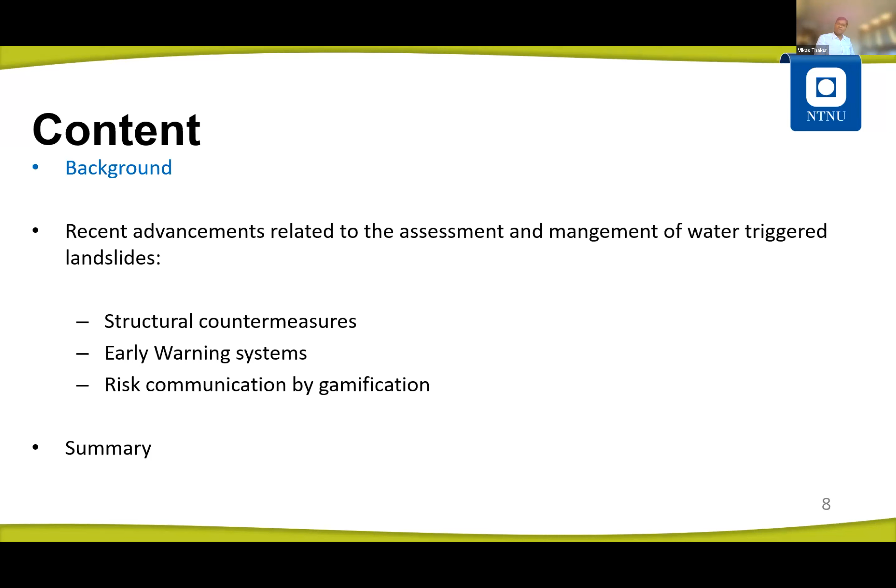So let's get going with background. I think it's good to start with our domain. Our domain is civil engineering, where geotechnical engineering belongs.

Or more specifically, let's say, construction industry. Of course, geotechnics has different applications, but if we limit ourselves to construction industry, what is the importance of our sector? Construction industry creates approximately 7% of jobs worldwide. It is responsible for 10% of GDP, but it also consumes 17% of fresh water due to different construction activities.

We are responsible for almost 40% of energy consumption and approximately 40% of CO2 emission. We use almost half of the raw materials available on this planet, and land harvesting is almost around 60%. So we usually call our sector a 40% sector, because it is responsible for almost 40% energy consumption, CO2 emission, use of raw materials, and so forth. So we can also say we are 40% of the problem we are facing in the construction industry.

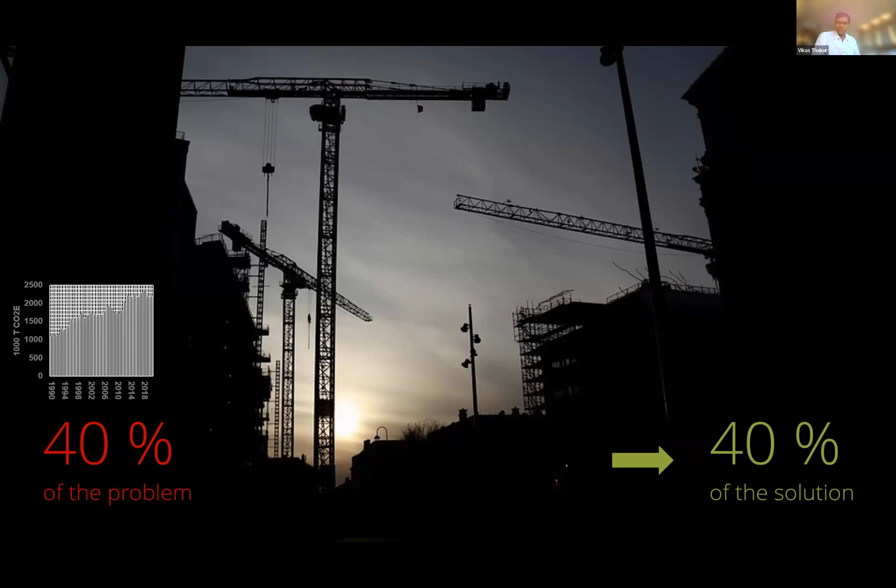The good news is that we have 40% of the solution as well to create a low emission society by 2050 or 2060. This can be done by adopting circular economy, smart materials, waste management, getting a green shift in the built environment, and also creating resilient infrastructure. So though our sector is responsible for a large amount of CO2 emission, I think we are also 40% of the solution.

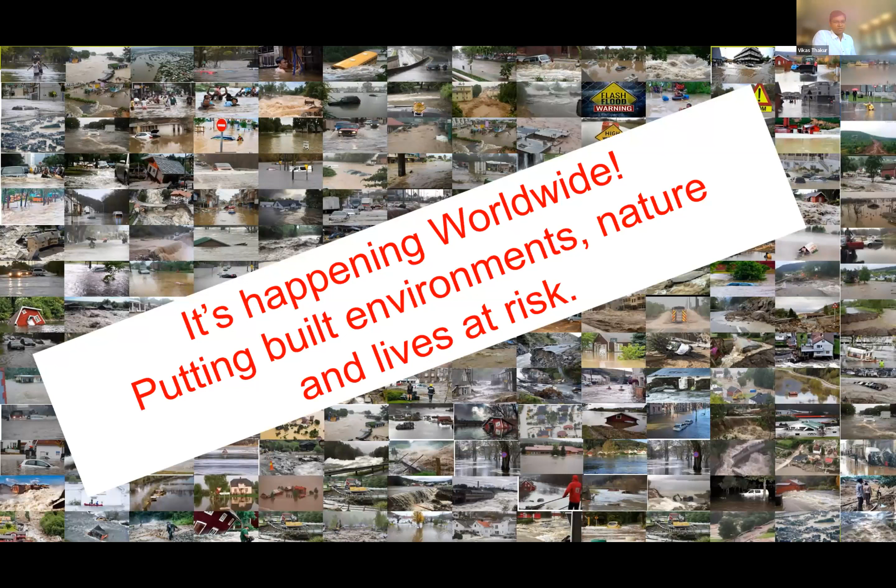I will say the future is already here. There was a time when we talked about climate change causing extreme weather events and so forth, but I feel it's already here. What we see - extreme weather events in terms of flooding, flood-induced landslides, and destruction of infrastructure - is happening worldwide, and it's putting built environments such as buildings, roads, railways, bridges, tunnels, or nature, and also lives at risk. So the future is here. We see already the impact of climate change all around the globe.

So it leads to societal safety. How safe are we? And do we have infrastructure that is resilient enough to handle the climate effects we see now?

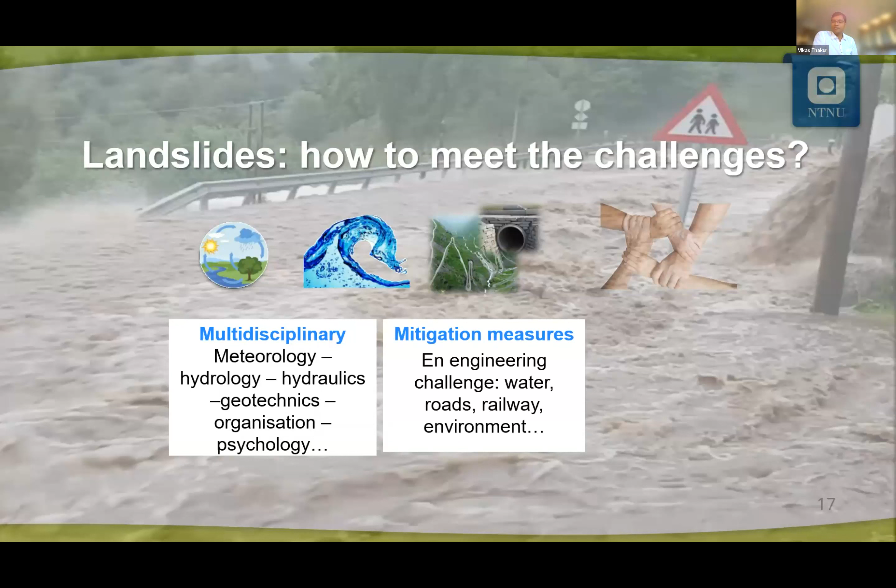Of course, we need to think about mitigation measures, which is an engineering challenge - how to make resilient infrastructure, how to make structural countermeasures capable of handling large landslide events. But preparedness is also equally important, because the way natural hazards are handled at county level, state level, or federal level, there are some challenges in terms of how preparedness is organized, how we communicate risk, and how we manage risk.

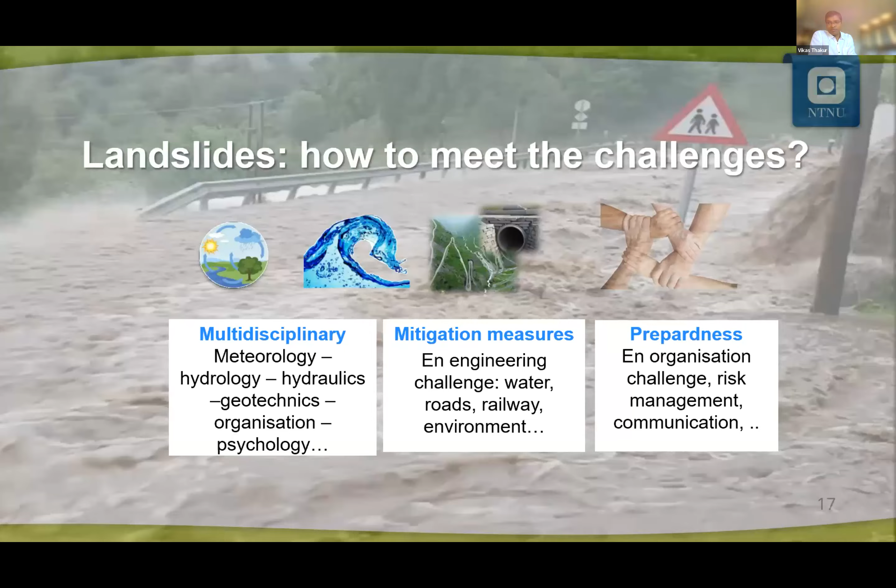I will briefly go through all these three in my presentation through some recent developments we have made. Whatever I present here are basically some selected results from a center which we recently executed, called Center for Research-Based Innovation, Klima 2050, and other research activities at NTNU.

This research center was a national center where NTNU, together with SINTEF, Business School in Norway, the Meteorological Institute, NGI, together with public and private partners, did a tremendous amount of work related to climate adaptation, where natural hazard, water-triggered landslides was one of the key areas. In addition, there have been several other ongoing research projects at NTNU, where 6 different PhDs have been working along with more than 30 master students. Also, a couple of professors and associate professors have been part of the team doing this research. So I'll present a summary of some selected results conducted by some of the PhDs at NTNU.

My focus will be towards water-triggered landslides, either soil slides or debris flows. I will start with structural countermeasures.

When we talk about structural countermeasures, there exist more than 70 types already. Those countermeasures are useful depending on landslide types, material types, velocity, and individual landslides.

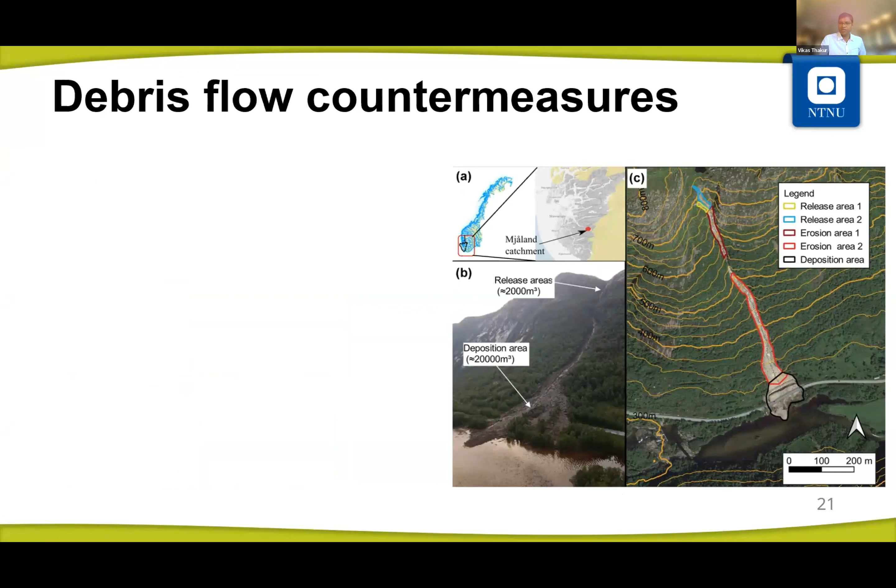What I will focus on now is debris flow countermeasures. Debris flows are becoming very common in Norway due to excessive rainfall. Basically, debris flows are very rapid to extreme rapid flows of fluidized, non-plastic soil-water mixture.

One typical challenge with debris flow dynamics is that they get significantly affected by entrainment, meaning the debris flow starts very small and its volume increases, which may lead to longer runout and high impact forces on infrastructure. So why does this entrainment occur?

Entrainment occurs when a debris flow shears a soil bed and generates excess pore pressure, which reduces the shear resistance of the bed.

In simple words, entrainment is a process where a debris flow or soil mass, as it goes downhill, collects more material along the way. As you see in the figure, the release area was 2,000 cubic meters. It's a photo of a debris flow event where the initial slide was around 2,000 cubic meters, and the total deposit was up to 10 times more, about 20,000 cubic meters, in the depositional area.

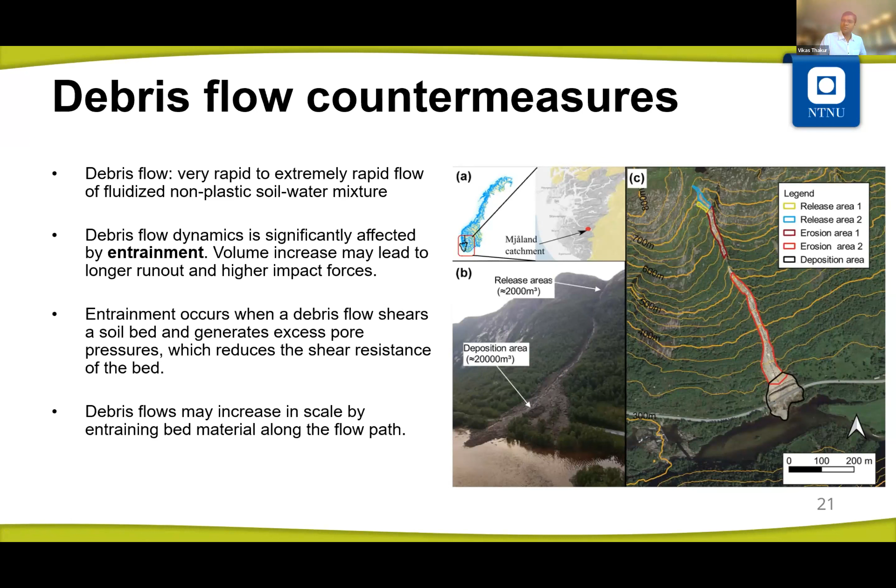As the debris flow propagated downhill, it collected more material and became larger and larger, just like snow avalanches. So in debris flow, one of the biggest challenges is entrainment, how to manage it, and it affects the design of structural countermeasures.

So what is a typical countermeasure used in Norway? It's a terminal wall, a simple structure used in Norway and many parts of the world, but it does not account for entrainment or flow volume growth. So how can we mitigate debris flow and reduce entrainment?

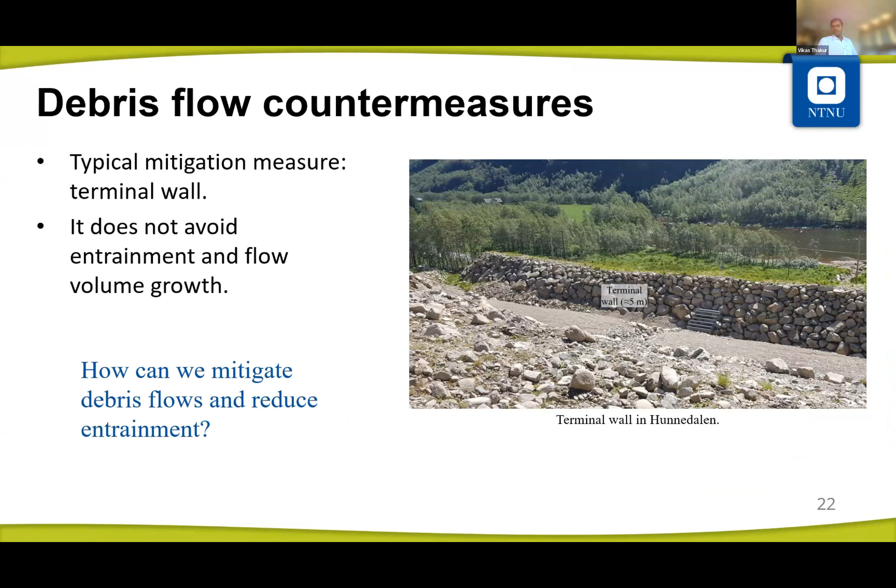Recently, two PhDs were conducted on this topic to study debris flow countermeasures accounting for bed entrainment. One PhD studied a screen structure for mitigating debris flow along coastal roads, and the second was related to flexible barriers.

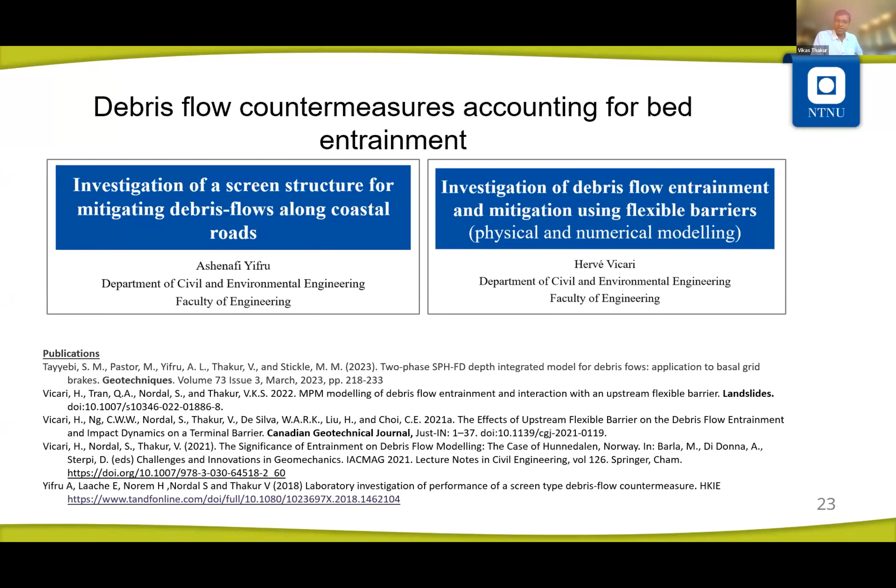I will present some results from these two works. They have made some publications which can be referred to for more information. The first work was related to the screen structure.

The idea of using a screen was conceived in Japan with the intention to reduce energy in debris flows and thus contribute to mitigating damage in the downstream area. The main purpose of this screen is to separate water, or the fluid, from the moving debris.

As a result, pore water pressure developed inside the debris flow, particularly in the shearing zone, dissipates. In return, debris solid particles regain their contact friction, thereby increasing the shearing resistance of the moving debris.

Basically, screens are very simple structures with grates, which have openings in between. So once debris passes on top of them, it allows water to seep through, as well as dissipating excess pore pressure.

In doing so, we increase the interparticle contact, and therefore the debris slows down and, in fact, stops.

We studied this at the lab, using about a 10-meter long flume, where 6 meters was the flume section.

Just a second, I'll get a pointer.

It's a flume which has a 6-meter long runout channel and a 4-meter depositional area. The flume was instrumented with various types of sensors to measure flow heights and pore water pressure at the base.

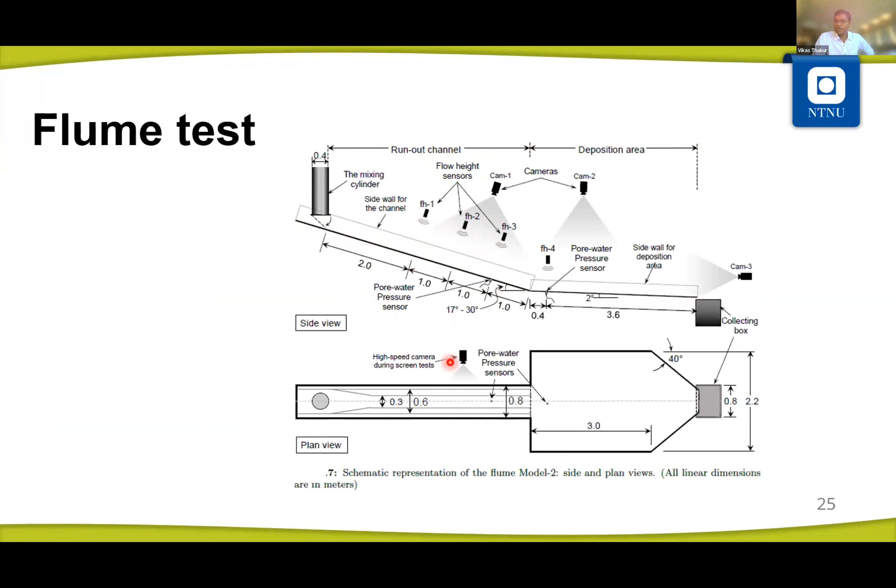We recorded videos using high-speed cameras, and different measurements were made using sensor techniques. This is how the flume model looks like.

Here is the runout channel, and here is one debris flow screen which was placed; the flume was 60 centimeters in width. Various tests were done by changing the length and size of the screen.

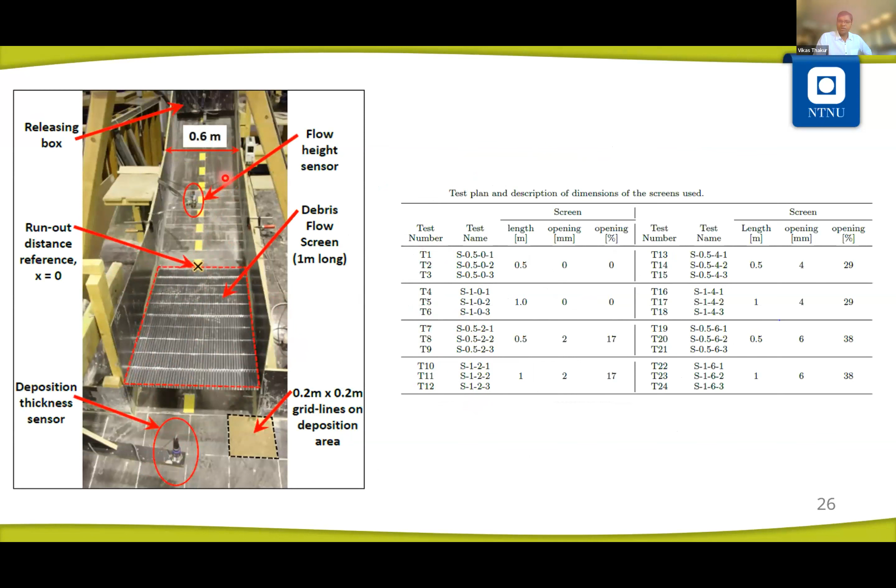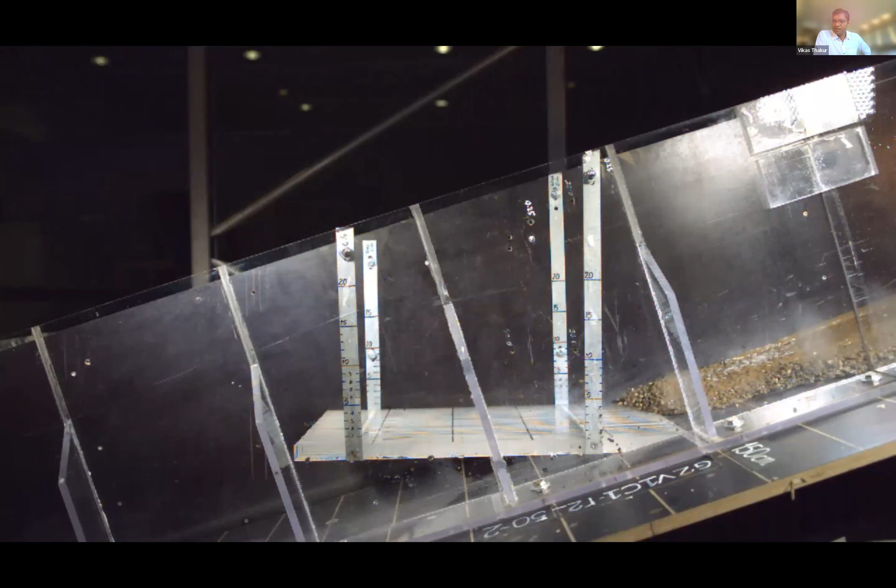Tests were also done by changing the concentration of the solid-fluid mixture. I will show you one result if I am able to. Here you see moving debris on the debris flow screen.

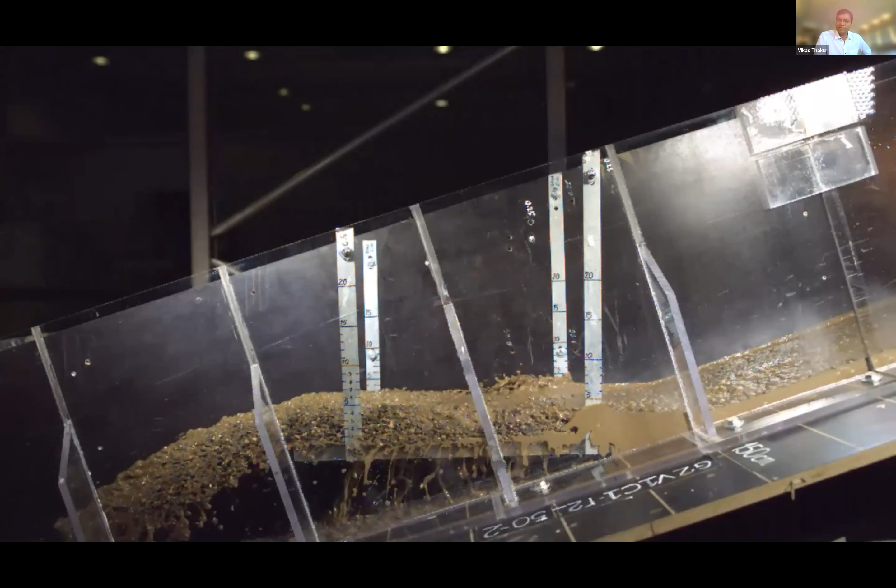As you will see, debris moves on top of it. Eventually, water will start to seep through the screen, and in doing so, intergranular contacts will increase, and slowly solid materials will pile up on top of this screen. It's worth mentioning that such countermeasures will not necessarily completely stop the movement of debris flow, but will significantly reduce the velocity, and thereby the impact caused by debris flow.

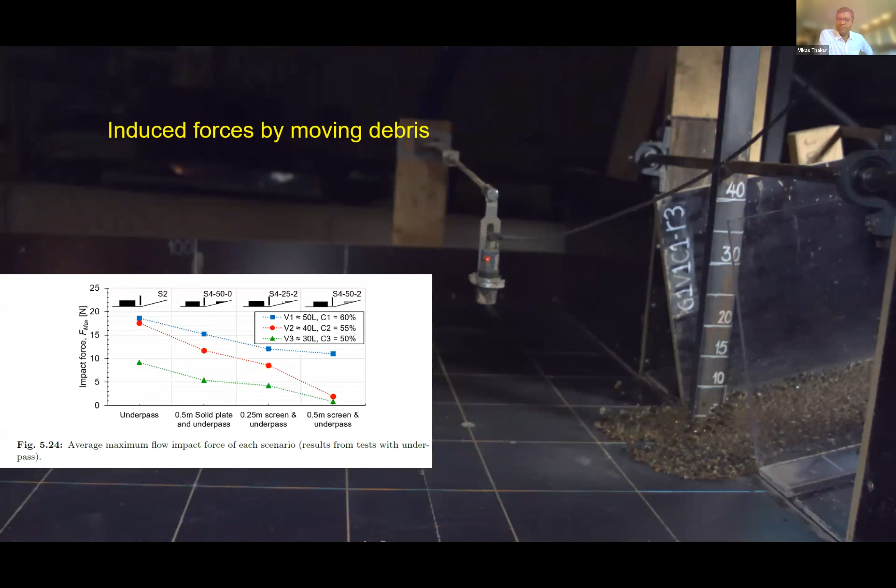So we studied the impact as well, and here you'll see this vertical pillar where we were measuring the impact of a moving debris. Quite many tests were done, and we can see that impact forces were reduced as we used a screen type countermeasure. You see some results on the figure to the lower left side, showing that impact force is reducing. So there were some promising results.

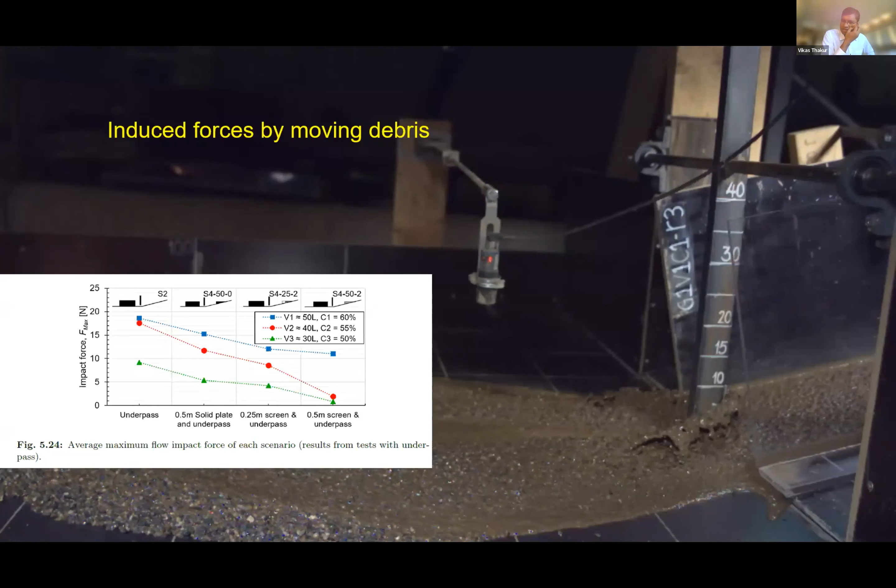Yes, this kind of screen may work despite it not stopping debris flow completely.

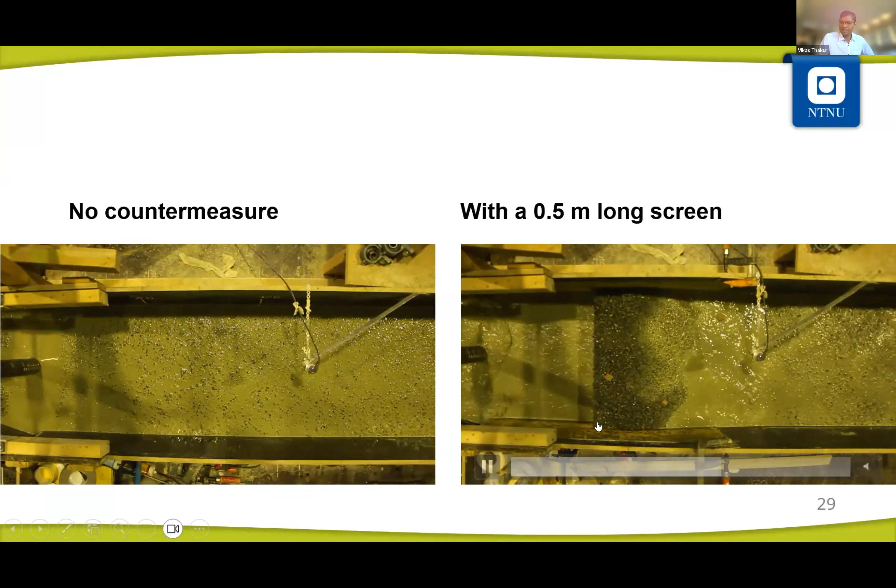Here you saw the same video in real time. The left one was without countermeasure, as you will see material just runs through. On the right side, you will see how quickly material stops on top of the debris screen. All these tests are done in the lab, and the lab has one very big disadvantage when we study debris flow, and that is scaling effect, especially with small models such as this.

So upscaling is always important, and to do so, we have to go for numerical simulations or sufficiently large model tests. At that time, we did not have a very large flume, so we decided to go for numerical modeling, using the GeoFlow SPH FD numerical model developed by the Madrid group and Manuel Pastor. SPH stands for smoothed particle hydrodynamics, finite difference numerical model.

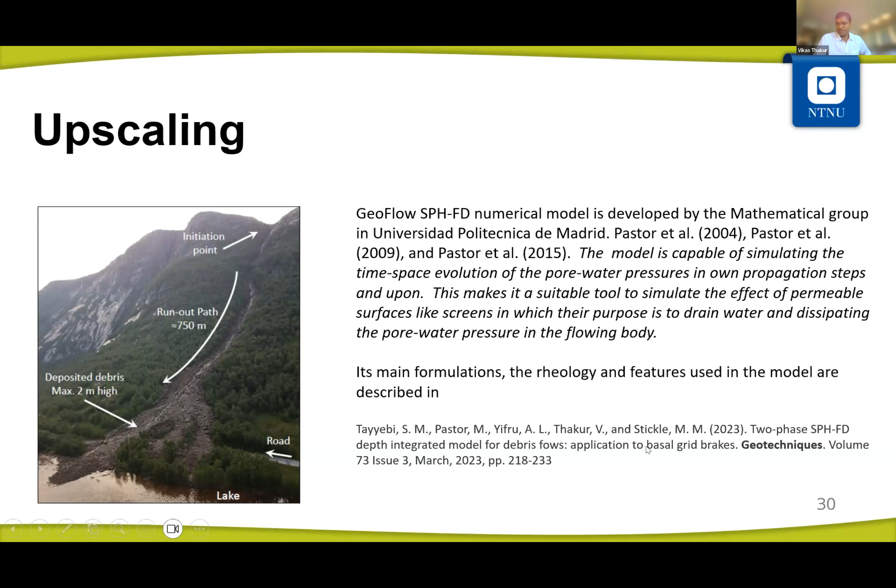The model is suitable for modeling debris flow screens because it's able to simulate the effect of a permeable surface, like a screen, whose purpose is to drain water and dissipate pore pressure in the flowing body. The formulations and rheology of the model can be obtained from one of the papers which was published recently in Geotechnique.

So in summary, the debris flow screens were able to slow down the mobility of the flow mass. The main purpose of the countermeasure was to dissipate pore pressure by filtering out the fluid part from the debris flow. The numerical simulations using this GeoFlow model gave quite promising results. It was able to replicate runout distance, flow heights, deposition height, flow velocities, etc. So the results are quite promising.

However, there are some practical challenges. How to install this kind of screen and maintain them, especially in steep terrain, will be very challenging. It will not be easy to install them. Perhaps it is more suited for flatter or mild sloping terrain, not for very steep terrain.

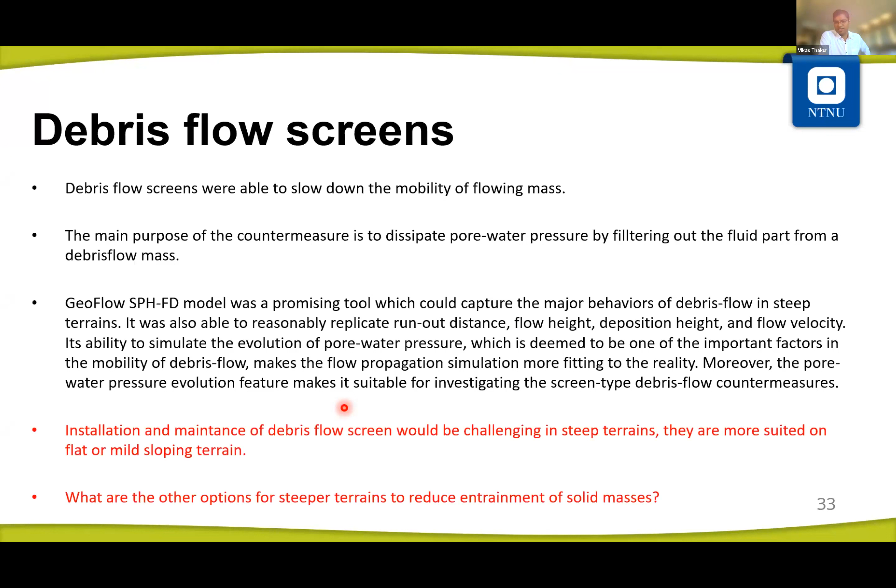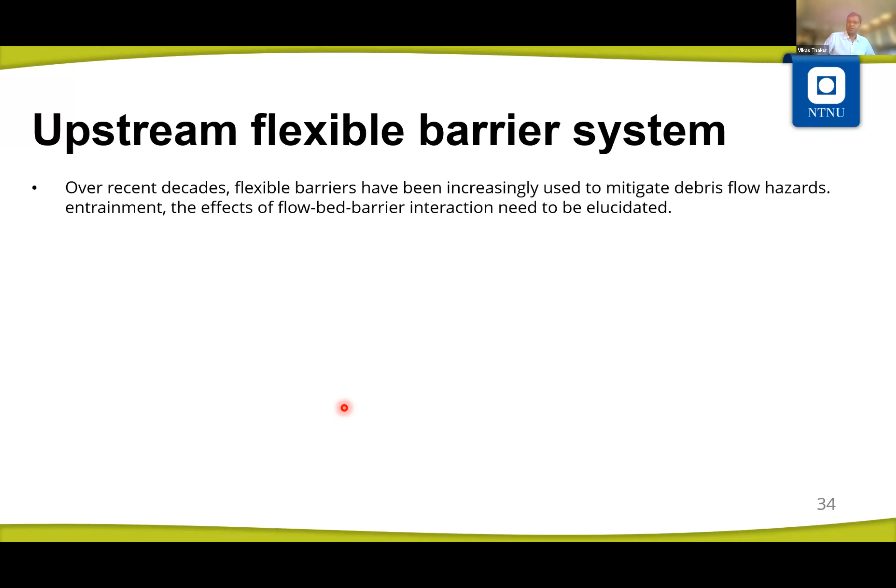So we started to look for other options to reduce entrainment of solid mass on steeper terrain, and that brought us to the upstream flexible barrier system, the second PhD work. Over recent decades, flexible barriers have been increasingly used to mitigate debris flow hazards. The entrainment effect of flow-barrier interaction needed to be elucidated. One of the design functions of installing multiple flexible barriers in a channel is to reduce bed entrainment.

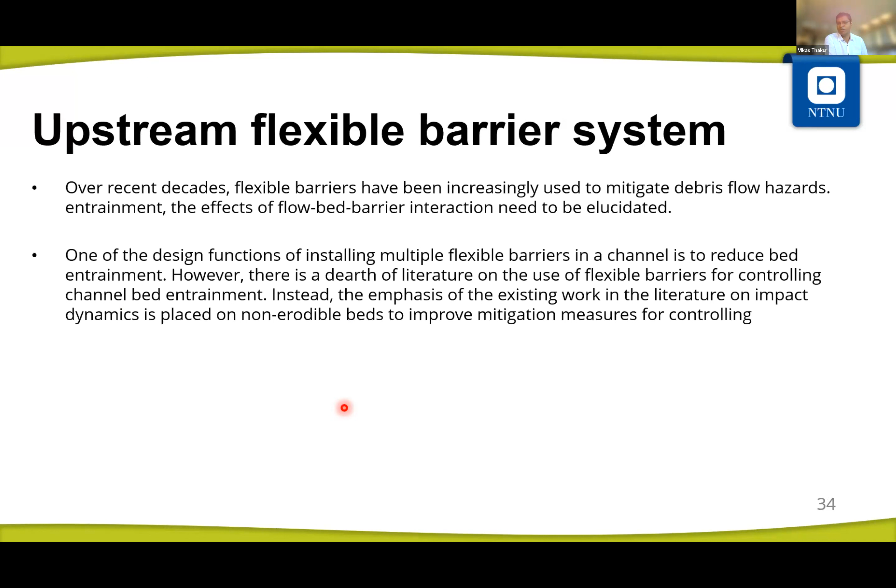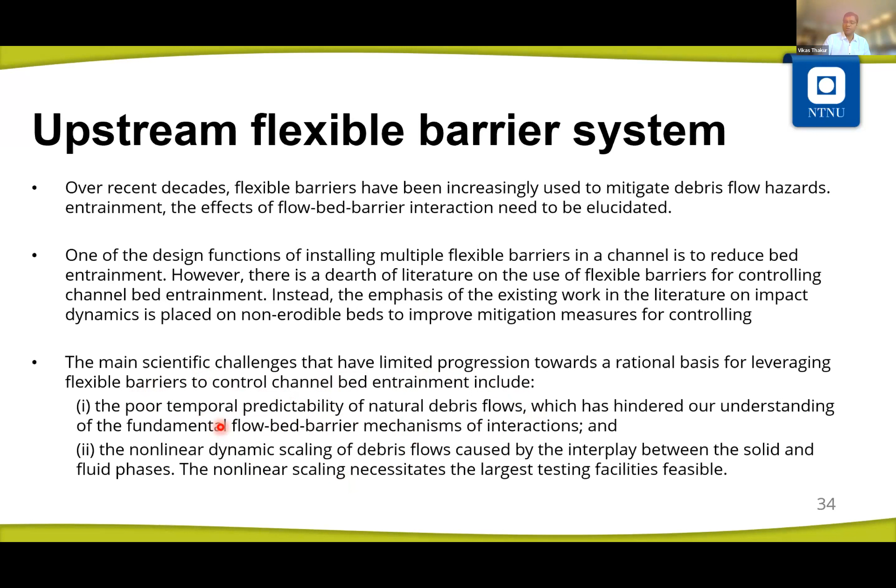However, there is a dearth of literature on the use of flexible barriers for controlling channel bed entrainment. Instead, the emphasis of existing work in the literature on impact dynamics is placed on non-erodible beds to improve mitigation measures for controlling flow. So there are some scientific challenges, especially in understanding bed entrainment because of poor predictability of where debris flow may take place, but also the scaling effect from very small flume tests. So what we did is actually a large-scale flume test, done in Hong Kong. The model, developed by Professor Charles W.W. Ng, was used to minimize scaling effect. We wanted to measure flow parameters in entrainment and also the influence of flexible barriers on entrainment.

This 28-meter long flume was utilized, where almost 7 meters was a fixed bed. We placed one upstream flexible barrier on the upstream side, and made an approximately 6-meter long erodible bed, with a terminal bed at the end.

We could use up to 10 cubic meters of debris flow material, 6 to 10 cubic meters of debris flow material in the test. Various measurements were made using some erosion measurement technique.

I'll come back to this, but also we measured the normal stresses and shear stresses to understand the basal stresses at the base of the debris flow, using cell 1 on the upstream side and cell 2 where we wanted to have entrainment.

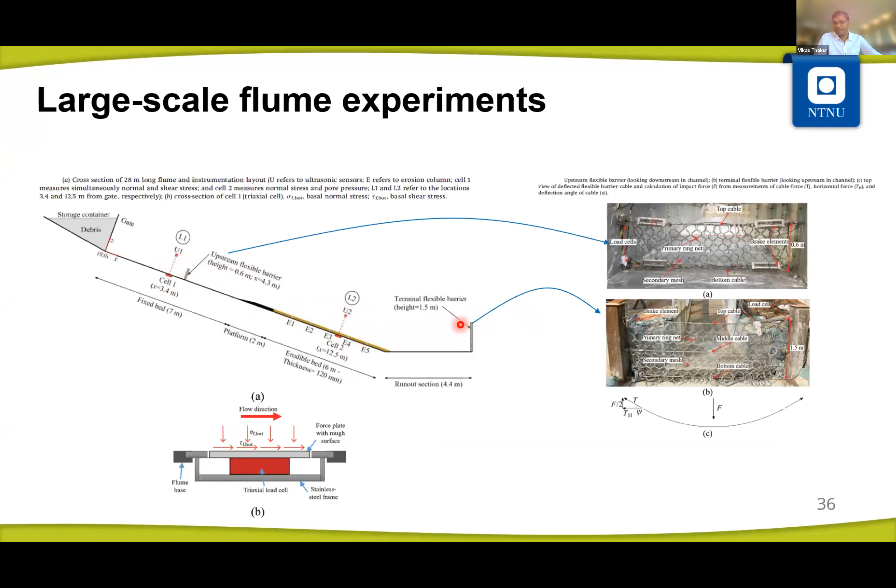Flexible barriers look something like this. The upstream flexible barrier was just 60 centimeters tall, whereas the terminal flexible barrier, where the mass is supposed to stop at the end, is 1.5 meters in height.

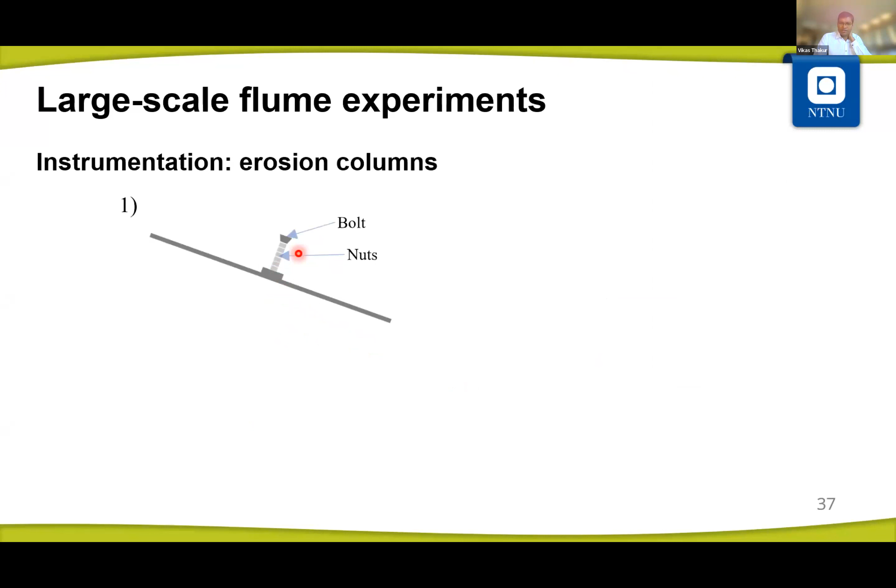To understand entrainment, we developed something called an erosion column, a very simple technique where we took 5-millimeter high nuts and installed them using a bolt in the model, just as you see here: E1, E2, E3, E4, E5. If you look at E1, for example, this is how the structure looks like.

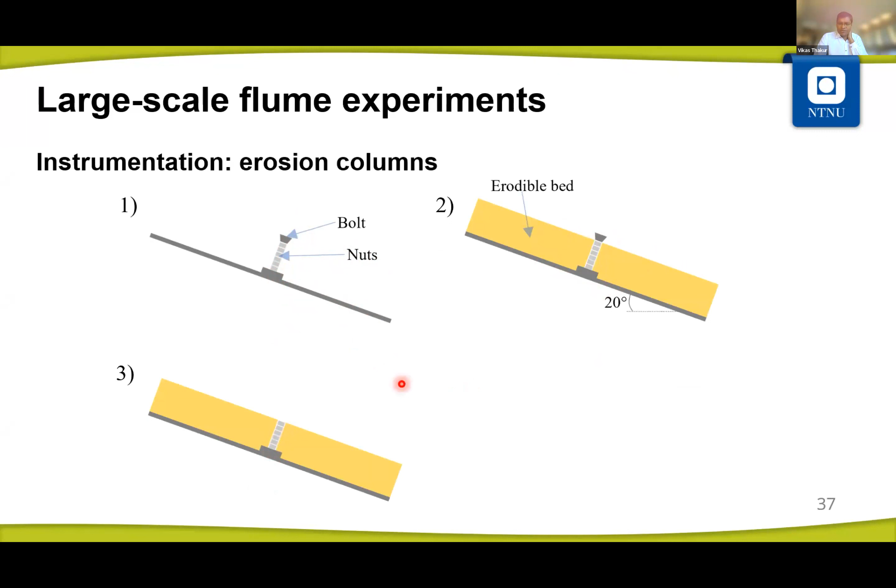The nuts were placed using a bolt. After this setup, we placed the erodible bed around it, and thereafter removed the bolt so that the nuts stood in the form of a pillar. Whenever we did the model testing and erosion took place, it also removed some nuts, through which we knew how much material had been eroded or entrained. The height of these nuts was 5 millimeters.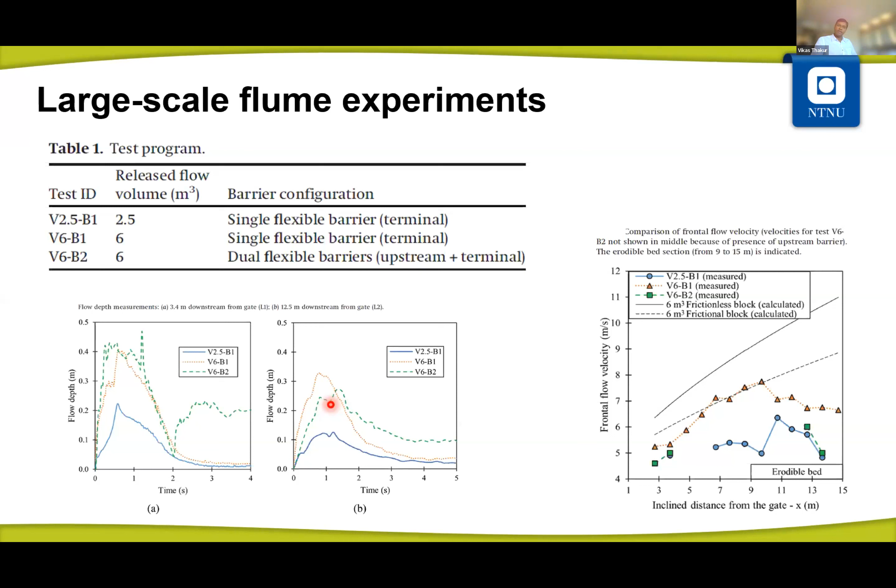Let's focus on the last 2 tests, since they were of similar volume, so we can see the effect of the flexible barriers. Various observations were made in terms of flow depth and flow velocity, and the results were compared. But before that, I can show you a video of the test.

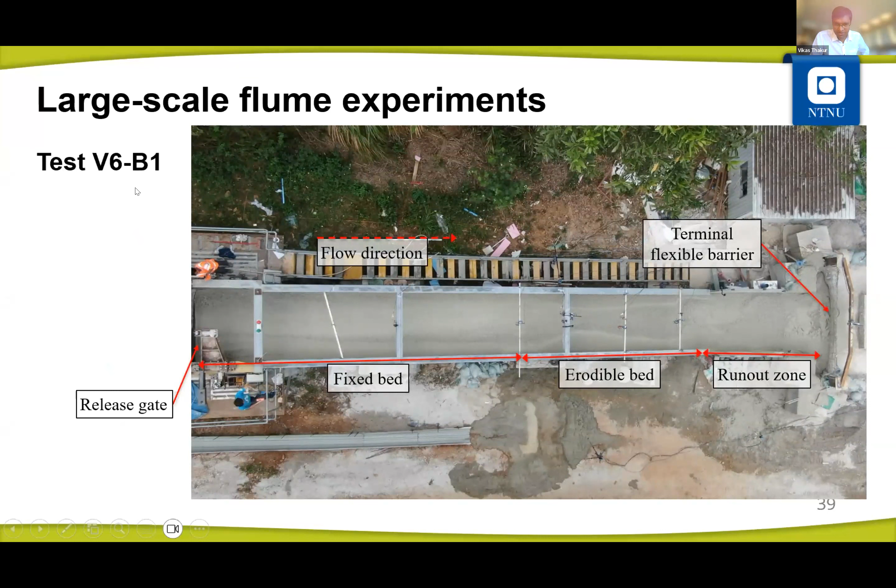And this is a video from V6 B1, where only the terminal flexible barrier was used.

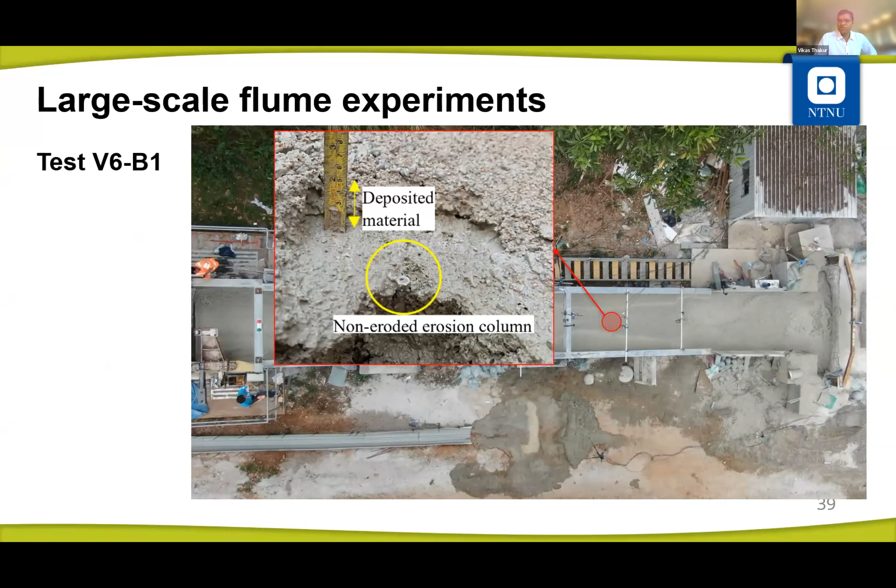We measured erosion in the entrainment zone by counting how many nuts were removed due to the erosion process, and we were able to measure the entrainment depth for each test.

The major conclusion is this: the higher entrainment happens at the start of the erodible bed. Higher initial flow volume also means higher entrainment, meaning that if more debris flowed onto the erodible bed, there was more entrainment.

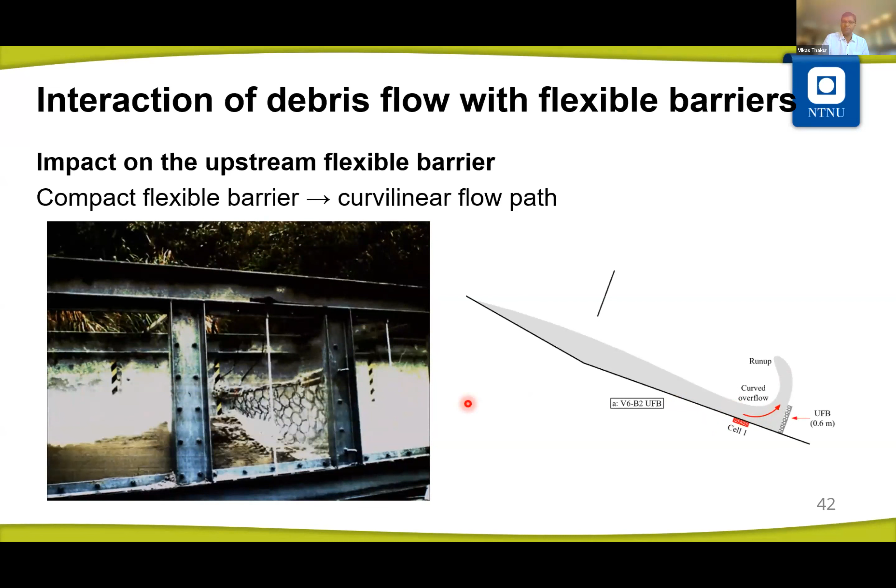So what is happening at the flexible barrier itself? It was interesting to observe that when we had the upstream flexible barrier, there was a curved overflow of the debris mass, and this has an impact on the design principle for the upstream flexible barrier. I'll come back to this.

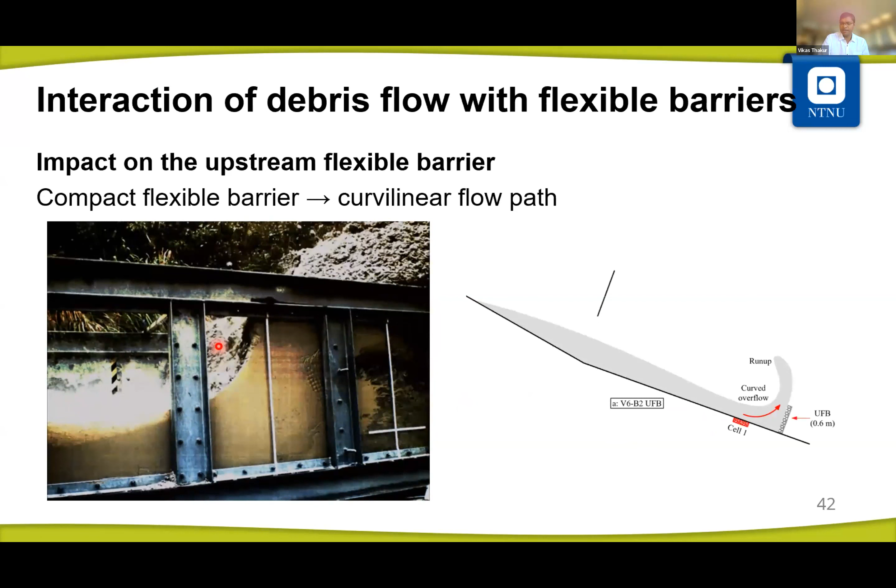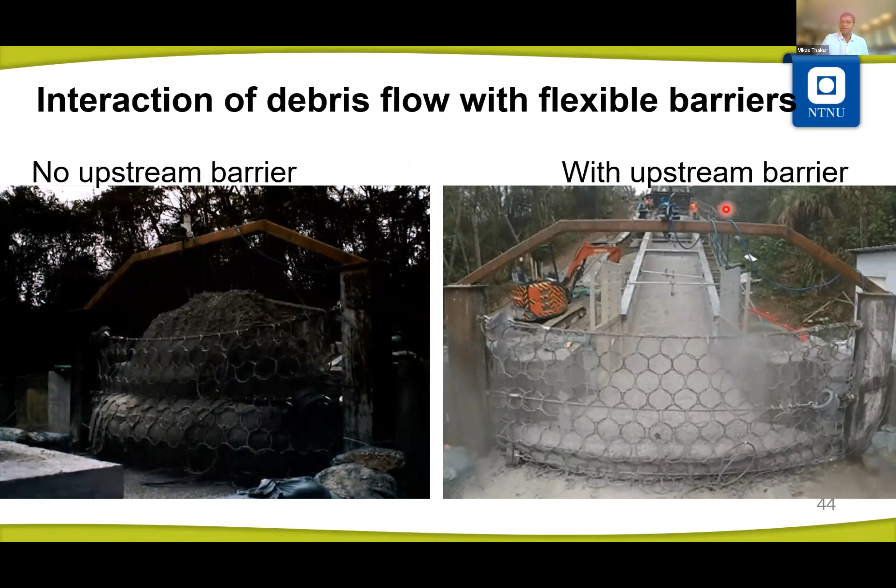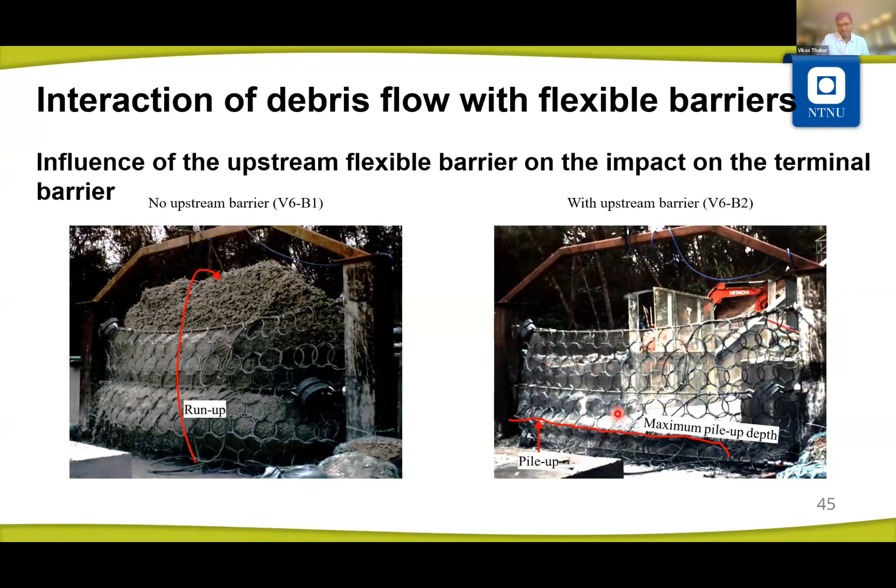What happens with the terminal barrier? When we don't have an upstream barrier, we see very high run-up, whereas when we have an upstream barrier, we don't see much run-up of debris flow. It also means that high run-up will induce very high impact force on the flexible barrier, whereas tests with an upstream barrier have very limited impact forces.

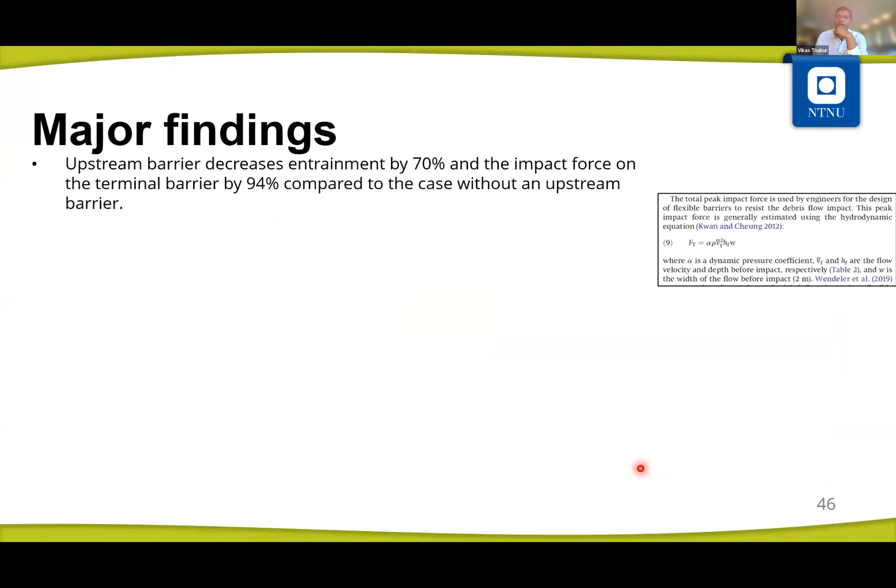The major findings were like this: upstream barrier decreased entrainment by 70% and impact force on the terminal barrier by 94%. We also realized that when we put an upstream barrier, the design dynamic pressure coefficient needed to calculate impact force was decreased from 1.2 to 0.2. This means upstream flexible barrier not only reduces entrainment but also reduces impact force, so we can optimize the design of the terminal barrier if we use an upstream flexible barrier.

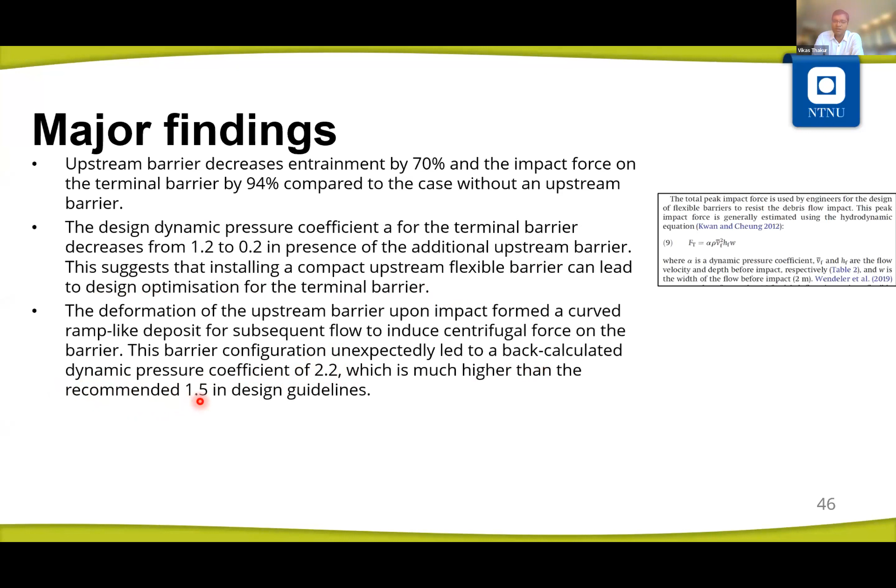However, when we use an upstream barrier, we need to be careful in designing it, because due to centrifugal forces there was a very high normal stress observed on the upstream barrier, and therefore the dynamic pressure coefficient became 2.2, which is much higher than the recommended 1.5 in design guidelines. This needs to be looked into further, and perhaps a higher coefficient should be used for the upstream barrier. Furthermore, studies are needed to understand the impact of debris, and how the maximum deformation and orientation of the flexible barrier behave.

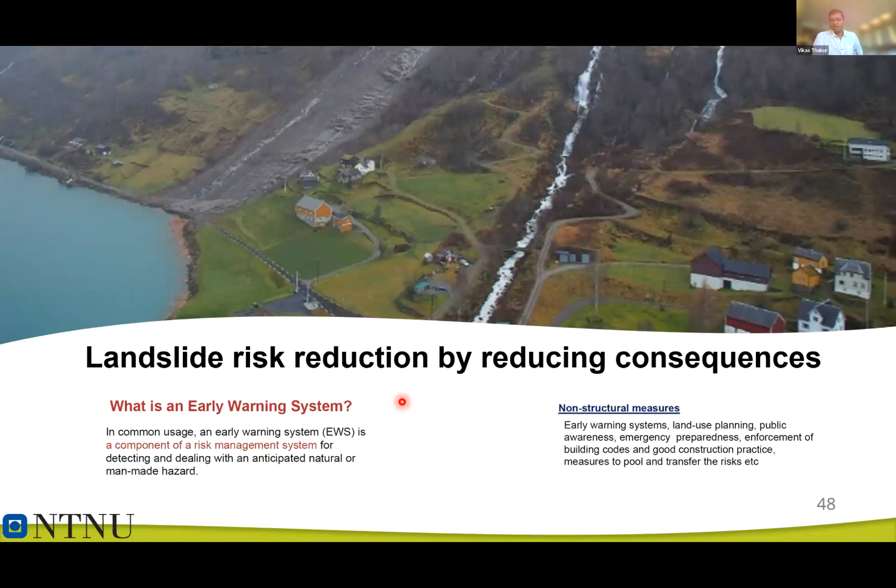I'll go to the next topic, which is non-structural countermeasures. As structural countermeasures are expensive, sometimes we have to rely on non-structural countermeasures, or perhaps a combination of both is best. When we talk about non-structural countermeasures, it is about early warning systems.

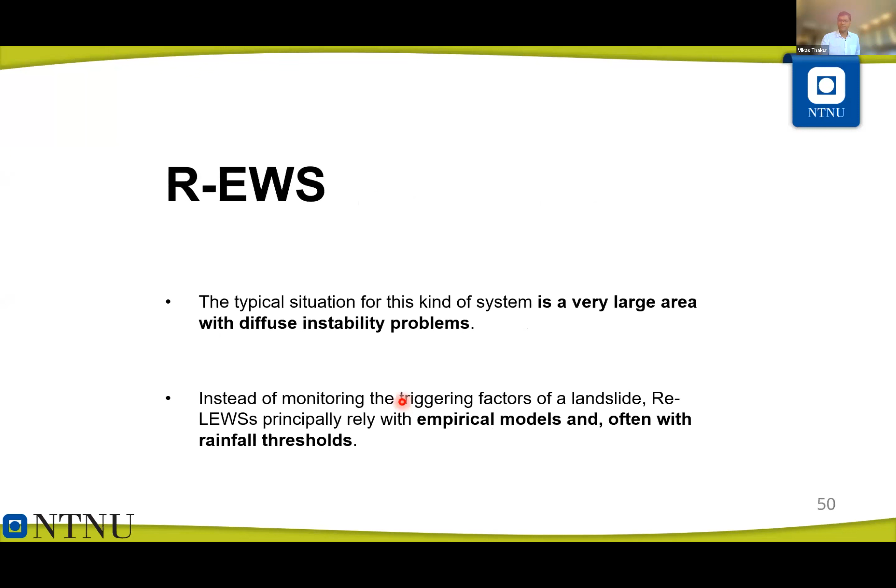Early warning systems can be of two types: regional early warning systems or local early warning systems. I'll talk about regional early warning systems. Usually they are given for large areas, and usually based on empirical methods. Early warning systems exist all around the world, in Asia, Europe, North America, and South America.

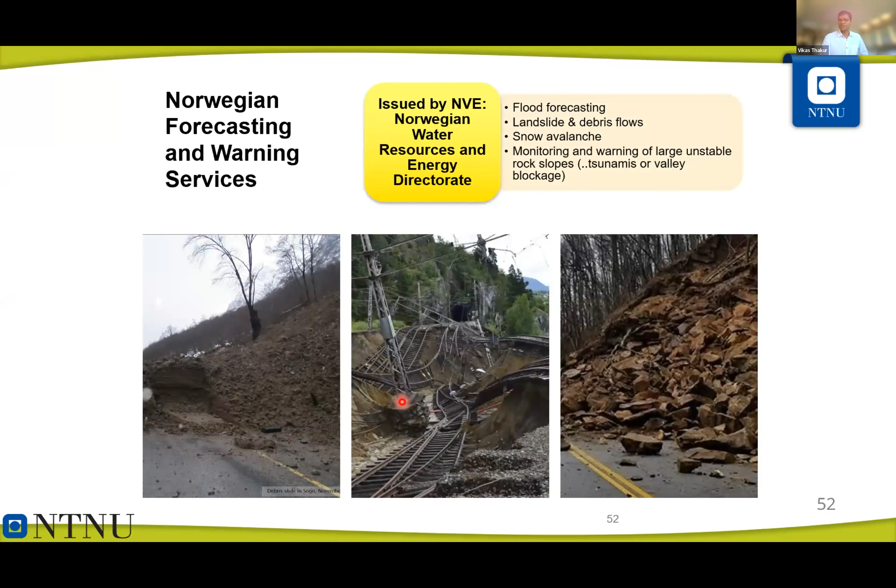In Norway, we have the Norwegian Water Resources and Energy Directorate, which issues early warnings for different landslide types and flooding. In Norway, we issue a regional early warning for soil slopes in a grid of 1 kilometer by 1 kilometer size.

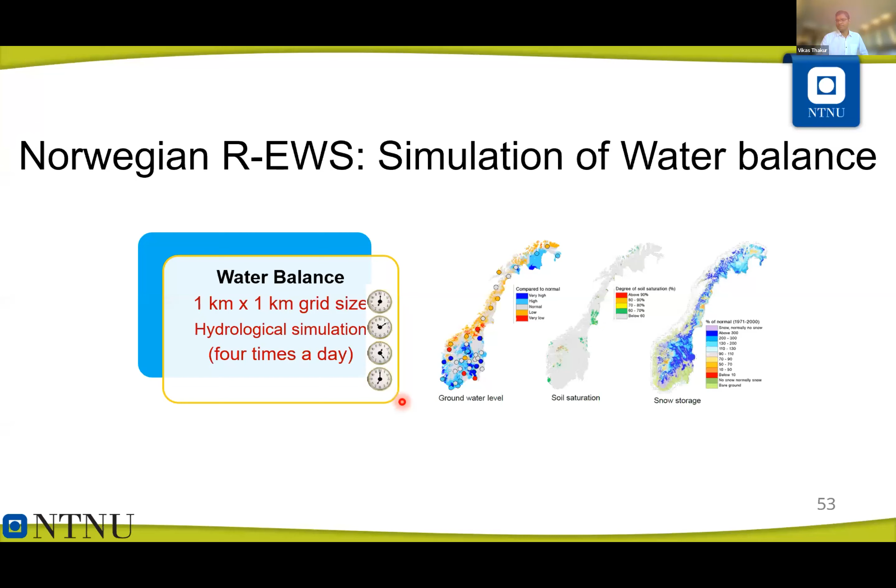This is based on a simulation of water balance. What it means is we look into how much water supply is added due to snow melting and rainfall to the soil, and what the soil saturation percentage already is. So if the soil is already very saturated, say 80 or 90%, it needs very little additional water supply before there's a higher chance of getting a landslide. We use a very simple technique: how much water is supplied through rainfall and snow melting to the soil, and what the initial saturation level is.

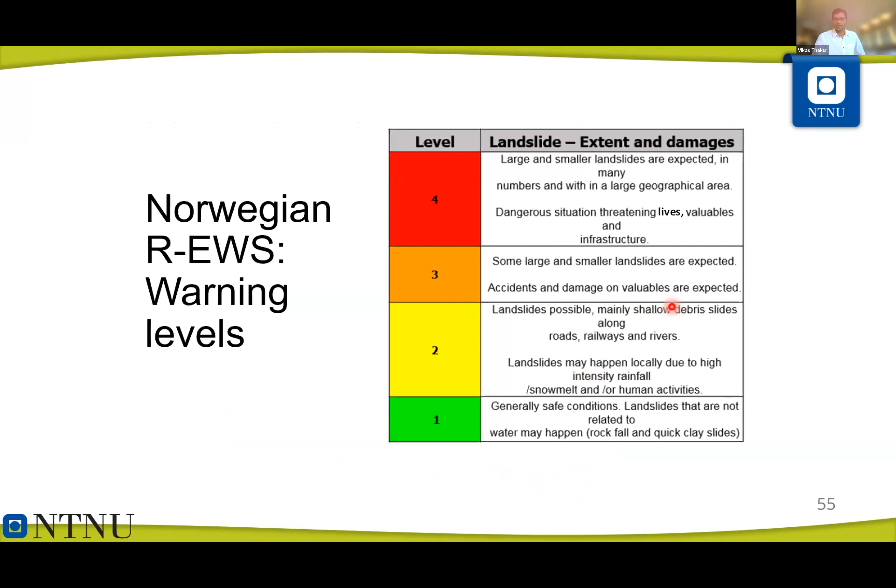We have 4 levels of warning system: level 1 is green, safe; level 2 is landslide possible; level 3, some large and smaller landslides are expected; and level 4, large and small landslides are expected, and we need to be prepared for quite many landslides, which can affect infrastructure and also cause damage to the environment and risk lives.

We have a website called XGeo where we issue early warnings. The first warning comes 72 hours in advance, and thereafter it becomes more precise, at 48 hours and 24 hours in advance, and then we can issue a warning for the area where there's a chance of landslide and so forth.

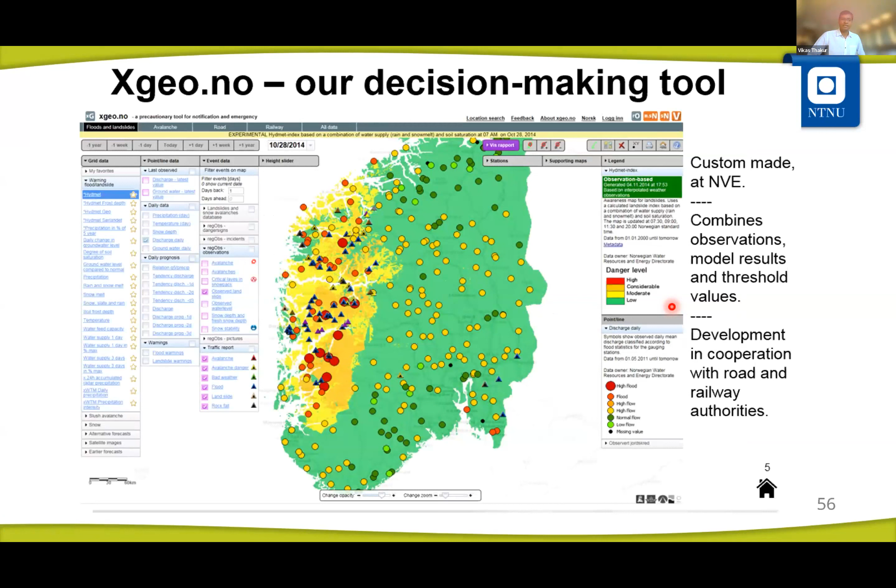But usually these kinds of warnings are given for a large area, and the areas can be very big, on the order of 10 by 10 kilometers or 100 by 100 kilometers. If we look into resources available at the county level, we need to think about how we can better prepare by allocating our resources and emergency response to the right location at the right time. We need to have even more accurate early warning.

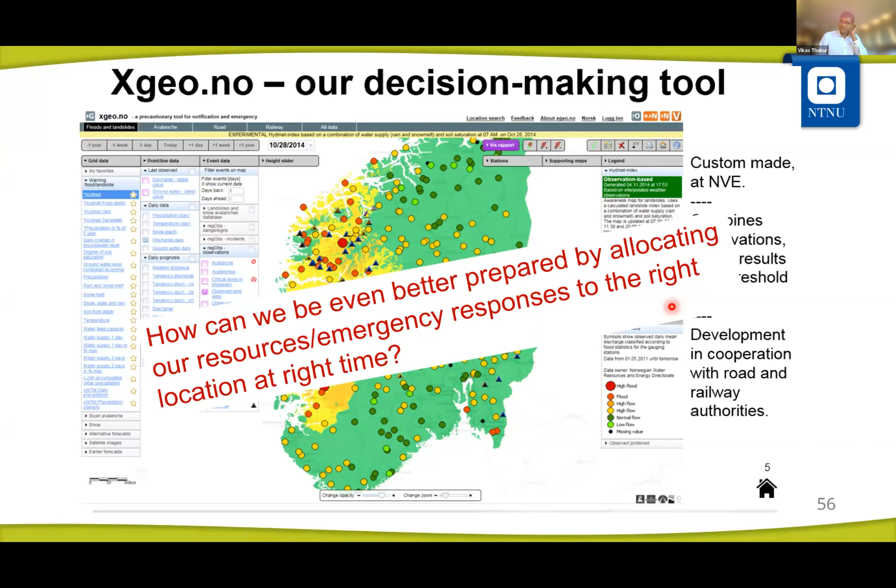So how can we do that? Perhaps we can think beyond what we do today. Perhaps we need to incorporate landslide susceptibility maps, and we need to incorporate climate models into the current early warning system. That was the motivation for another PhD study, conducted recently together with Norwegian government agencies, research institutes, the meteorological department, as well as some technology providers. The topic was related to quantification of climate change impact on rainfall-induced shallow landslide susceptibility.

This topic has been studied quite a lot around the world for different types of landslides, but also different climate abnormalities. Several studies investigated the effect of climate change on landslide susceptibility by employing a physical-based model with rainfall events downscaled from global circulation models to regional climate models. To the extent of our knowledge, none of these studies attempted to investigate overall climate change impact.

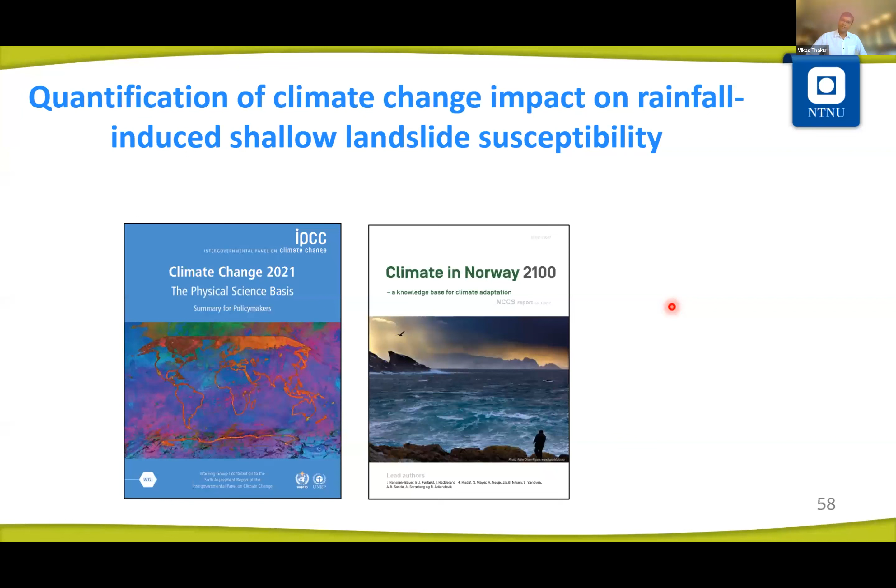They mainly investigated only rainfall events of different return intervals, especially extreme rainfall events of long return intervals. However, considering only extreme rainfall events with a low probability of occurrence may overemphasize the climate change impact on landslide susceptibility. So this is something to be aware of.

So we developed a new modeling framework where we integrated the climate modeling chain with the landslide modeling chain.

The climate modeling chain was based on emission scenarios, and we chose emission scenario RCP 8.5, which is a pathway that delivers a temperature increase of about 4.3 degrees Celsius by 2100 relative to pre-industrial temperature. RCP 8.5 is a worst case scenario, and we chose that.

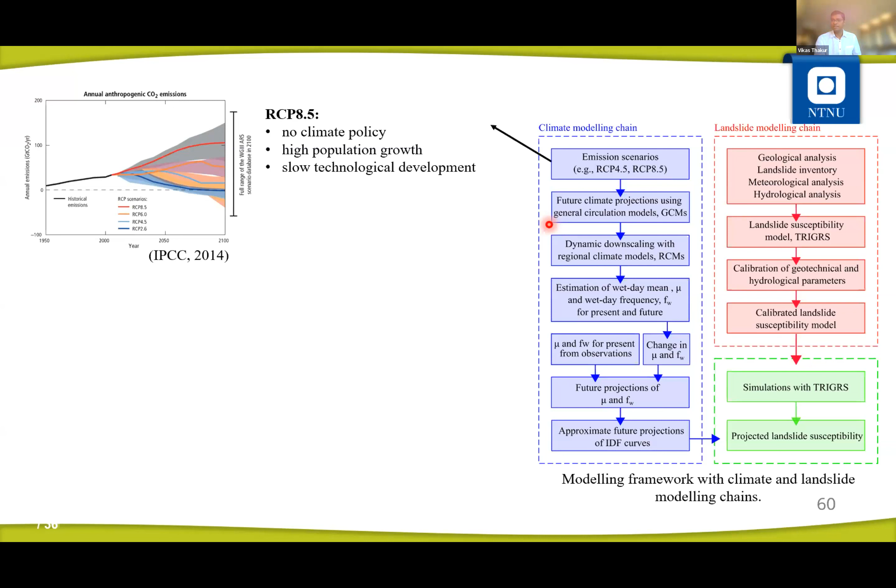Change in climate was calculated based on dynamically downscaled climate model data and historical observations of precipitation. For that, we needed a general circulation model, which was downscaled to regional climate models, also accounting for local atmospheric phenomena. The purpose of getting this regional climate model was to deduce intensity-duration-frequency curves for future climate conditions by utilizing future climate projections from EURO-CORDEX, combined with present climate conditions.

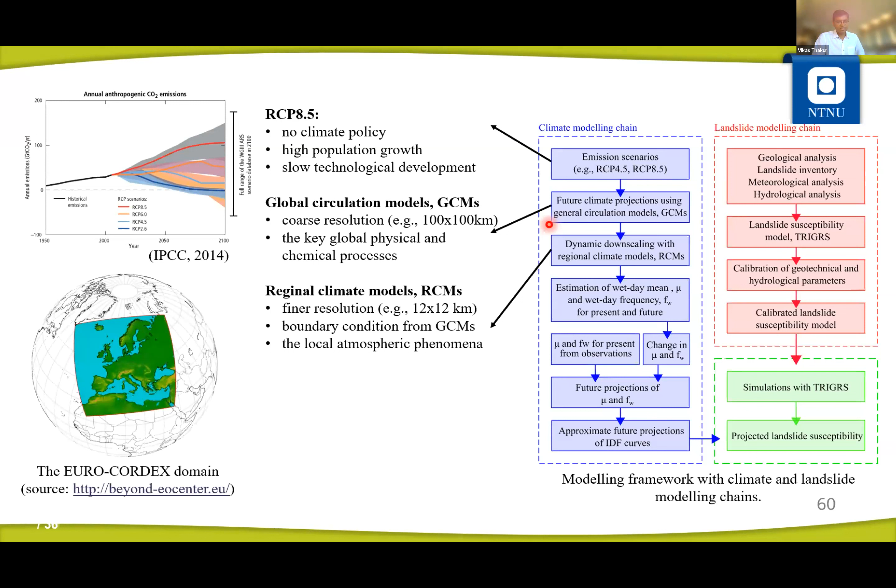EURO-CORDEX domain is the European branch of the International CORDEX Initiative, a program sponsored by the World Climate Research Program to organize an internationally coordinated framework to produce improved regional climate change projections for all land regions worldwide.

Through this climate model, we were able to generate IDF curves—intensity, duration, frequency curves—which were used together with the landslide modeling chain.

The landslide modeling chain was a physical-based model where we used TRIGRS, transient rainfall infiltration and grid-based regional slope stability, a very well-known model. The effect of climate change on landslide susceptibility was investigated by simulating rainfall events with varying duration and intensities based on the IDF curves from the climate modeling chain.

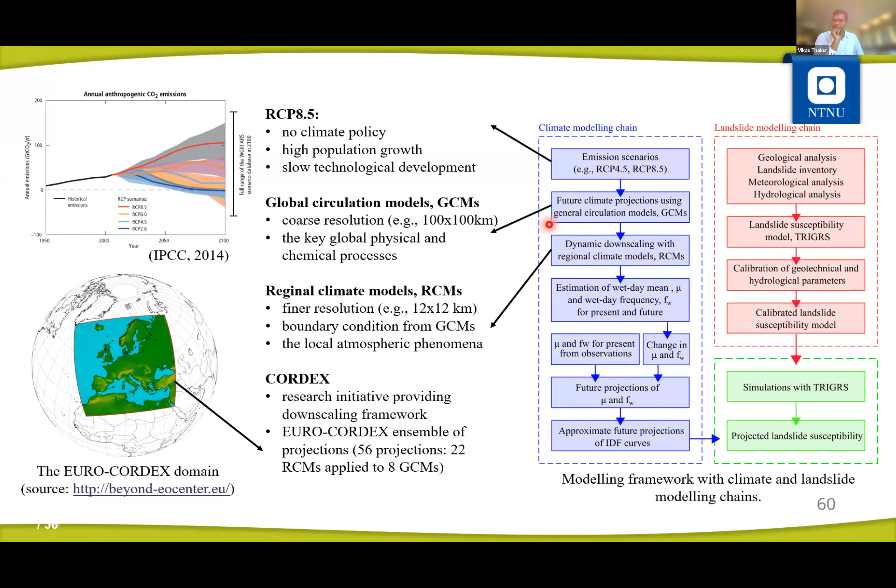So the IDF curves were provided by the climate modeling chain, and supplied to our TRIGRS model to obtain landslide susceptibility.

IDF curves were generated using the equation shown on the screen—you can read the details. This simple, semi-empirical equation was suggested by the Norwegian Meteorological Institute in the publication by Benestad et al., in 2019 and 2021.

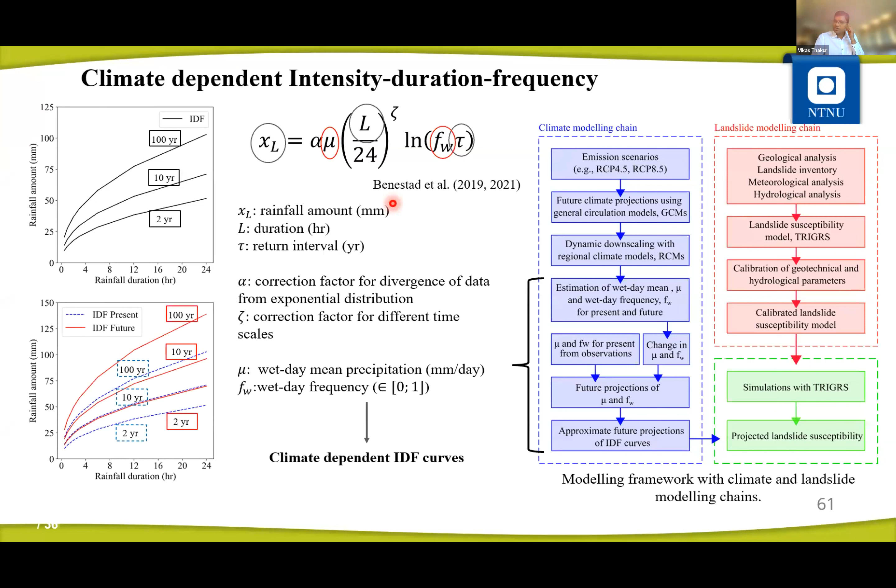So basically, we have climate-dependent IDF curves, which are used in landslide modeling.

To test this framework, we chose one case area nearby Trondheim, a large area, where we generated IDF curves based on the regional climate models. We divided the time periods into three: present, near future, and far future. Present is 1981 to 2010, near future is 2021 to 2050, and far future is 2071 to 2100.

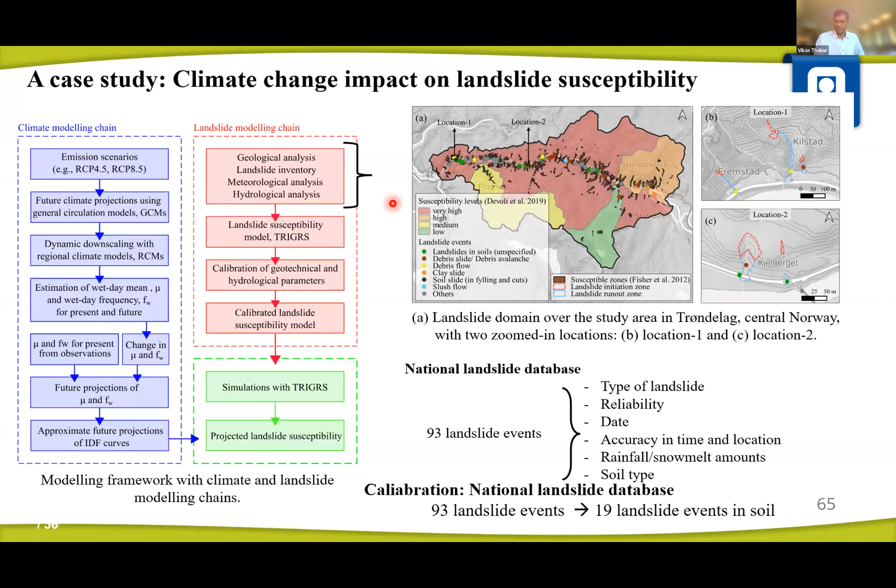We studied the area for soil type and previous landslide events. Those landslide events were studied and back-calculated to calibrate the model.

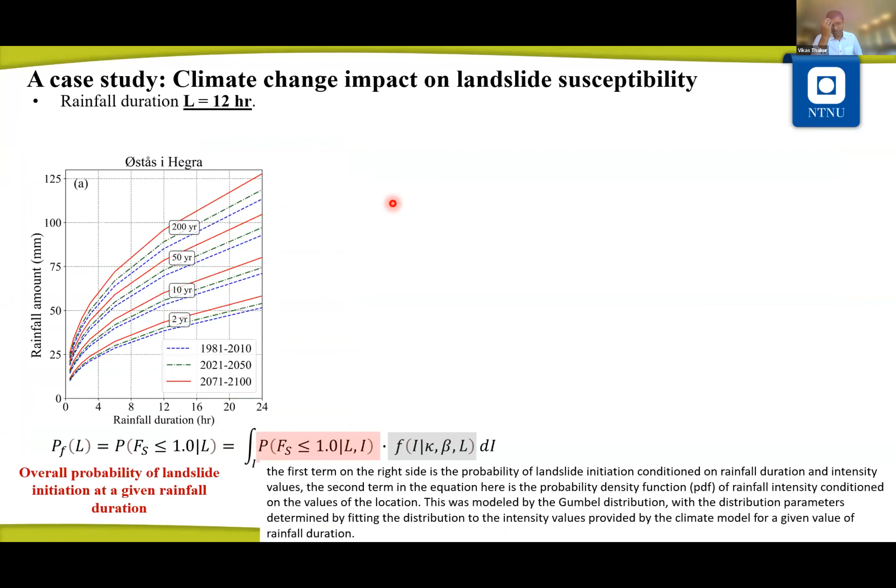Once calibration was done, the IDF curve obtained through the climate model was used to calculate overall probability of landslide initiation at a given rainfall duration. You see on the screen, rainfall duration of 12 hours, and for that, results will look something like this.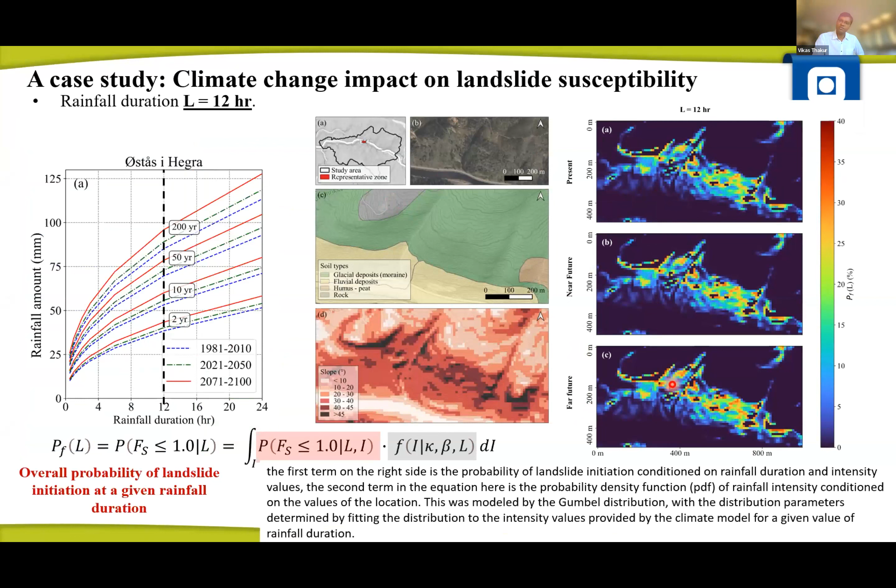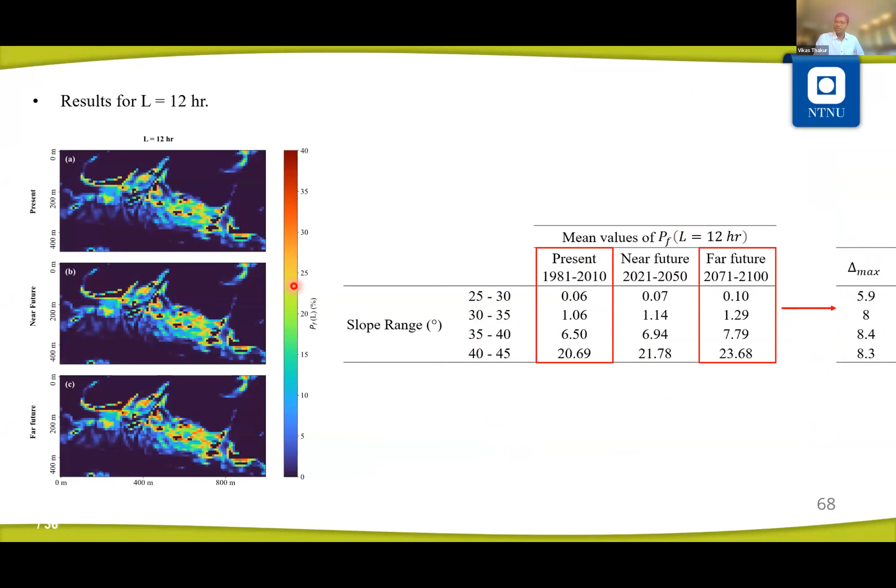For present, near, and far future, you see three different plots for the landslide susceptibility map. They look similar, but if you go into details, you will see, depending on different soil slope ranges, how the probability of landslide will change from present, to near, to far future. And we can see an increase in probability of failure in the future for this area.

In addition to that, we also looked at how large an area can be susceptible to landslide in the future.

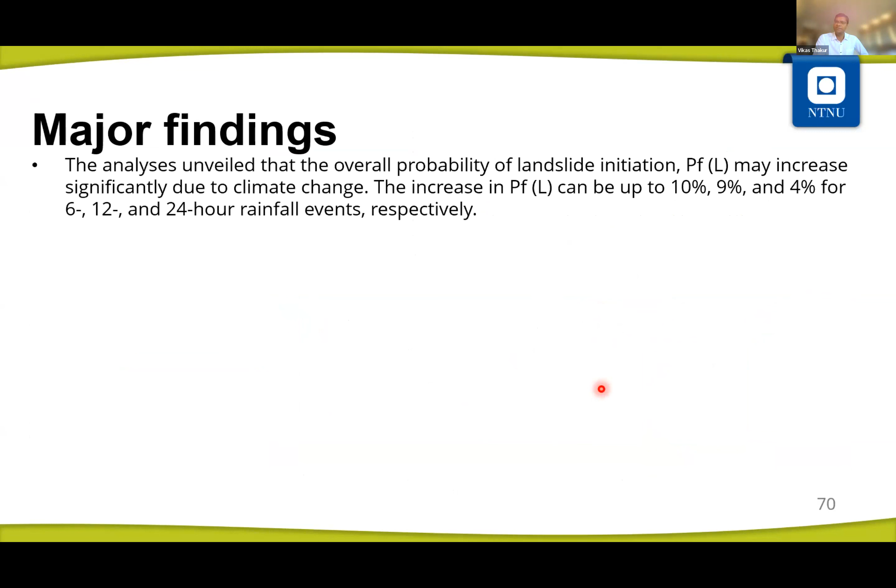The major finding from this study was that climate change will affect landslide probability of failure, and it can increase by 4 to 10% depending on the rainfall interval we choose. If we only look into extreme weather events, the probability of landslide failure for this area will increase by 27% for a 10-year return period, 12-hour duration. This study was probably the first attempt to integrate a climate model into landslide susceptibility assessment by considering multiple rainfall events with their corresponding likelihood of occurrence in a probabilistic framework.

The proposed integration framework shall lead to more accurate detection of critical zones with a higher increase in probability of landslide initiation under climate change. Therefore, a better strategy to tackle upcoming risks can be developed and better preparedness can be achieved. The overall message here is that we are now going towards more dynamic landslide susceptibility maps that can be integrated to offer even more accurate regional early warning systems.

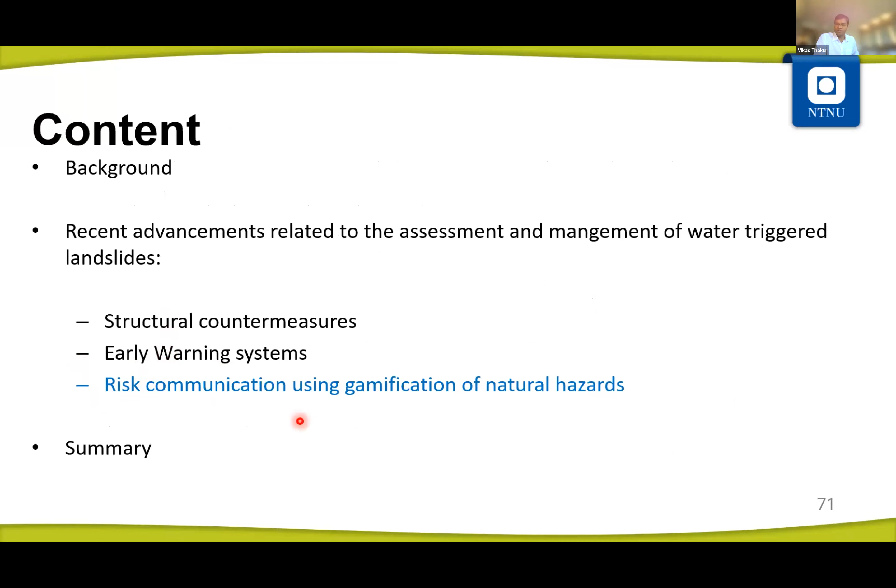I'm coming towards the final part of my presentation, and I'll talk about a different topic than the other two. It's risk communication using gamification of natural hazards, part of digital transformation projects at NTNU. There are 9 projects being run with 48 PhDs. Around 6 PhDs are working on something called World of Wild Waters, gamification of natural hazard, a transformative way of thinking how to handle natural hazard.

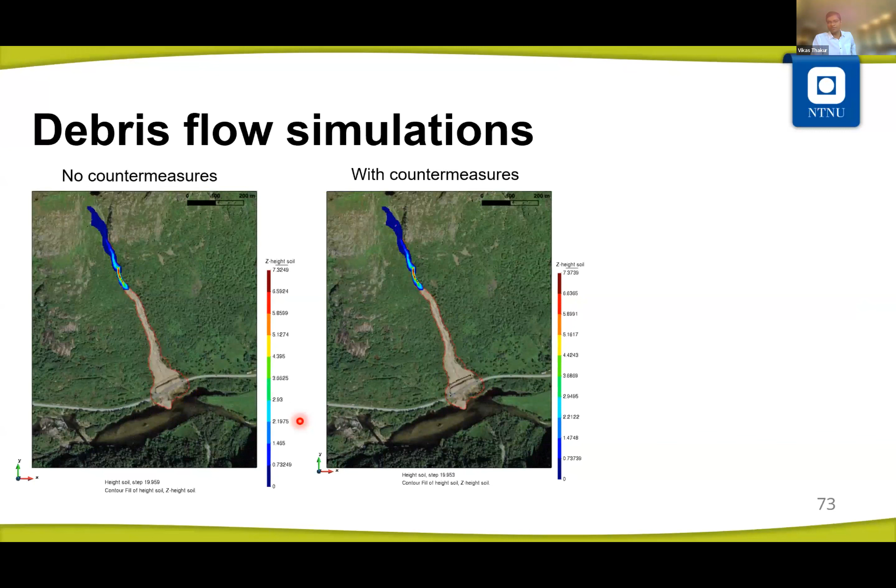As you see on the screen, some numerical simulations which we have done for debris flow. You will understand it because we are geotechnical engineers. But when you show all these colorful images to the general public or policymakers, decision makers, they don't understand it. Even though we want to communicate something very important, we are not able to communicate to them. That is the motivation behind this whole project: how to use digital tools to do better communication.

How can we use immersive technologies, advanced technologies, to make tools dedicated to specific users, to test emergency response plans, and also tools which can be consistent and repeated for training purposes for the first responders without real exposure to the hazard. So using digital technologies for better risk communication, that has been the purpose.

The project had a 6-part where we had to create photorealistic data. We had to do realistic simulations of both floods and landslides using virtual reality, creating user experience, but also including human behavior. To succeed in this, we had to have a multidisciplinary team. Currently there are 5 professors, including me, working on this - hydrologists, from computer science, from mathematics, from psychology, from geotechnics - 5 professors together with 6 PhDs working together to develop some interesting tools.

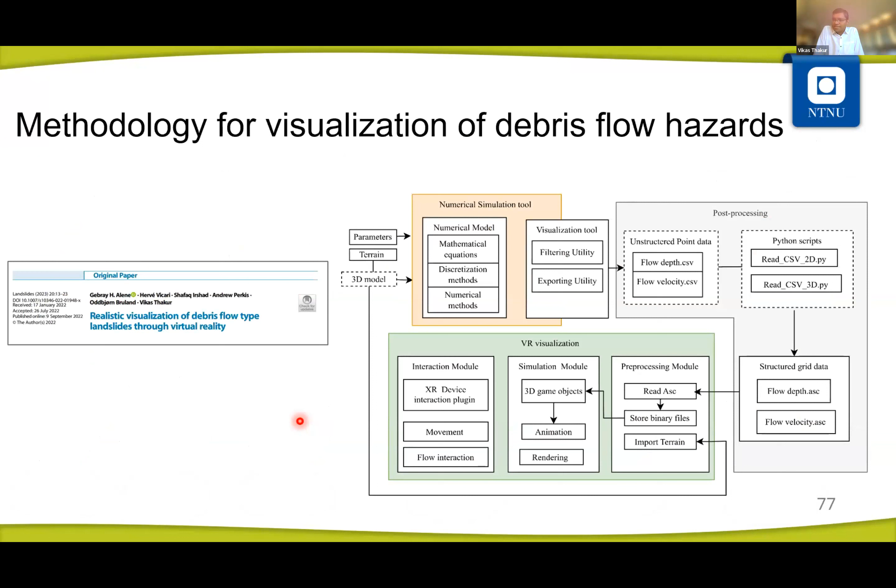There's one paper recently published on visualization of debris flow type landslides through virtual reality. There you will see a complete methodology for how we can do the visualization. We need different tools to visualize. We need to do our classical numerical simulation, but we also need to think of post-processing of the data to bring it into a virtual reality setting. In a simple way, I can put them in this format, which is easier to understand.

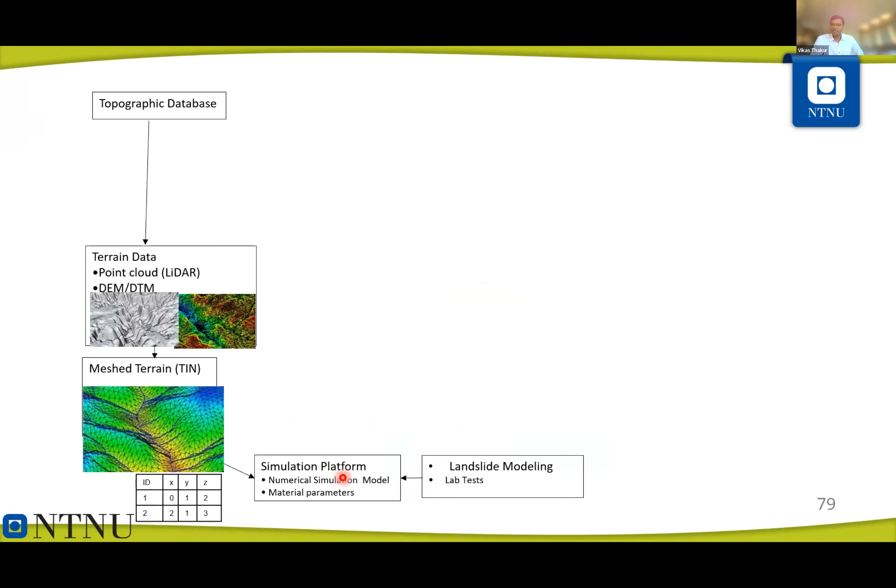Topographic database, this is where we start. As geotechnical engineers, we know we need terrain data, DTM, LiDAR, to create terrain information, to create a mesh for our numerical simulations. Once we have that mesh information, we can do numerical simulations using different software. We need soil parameters to do landslide modeling, so we do lab testing. We need other meteorological data and so forth. This is our typical soil mechanics, geotechnical engineering practice when it comes to landslide analysis. We need terrain information, material information, and a simulation platform.

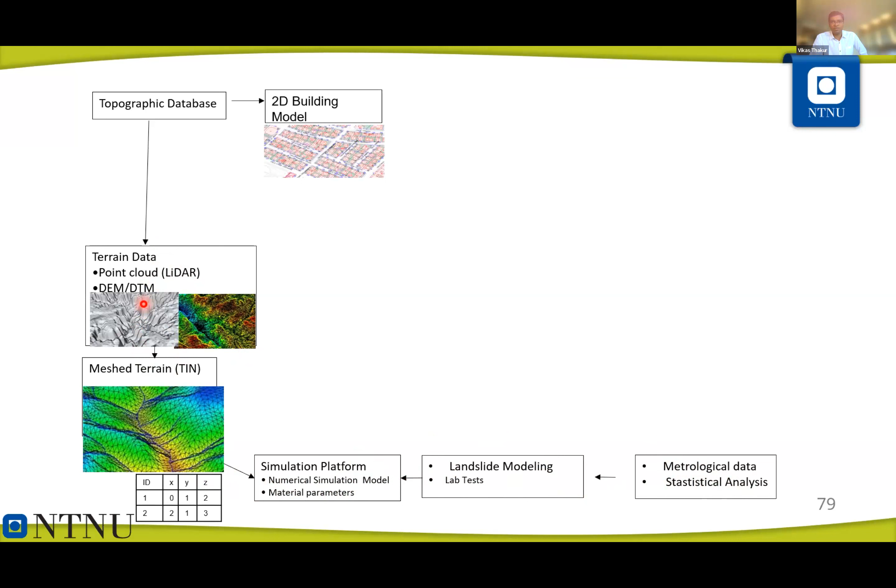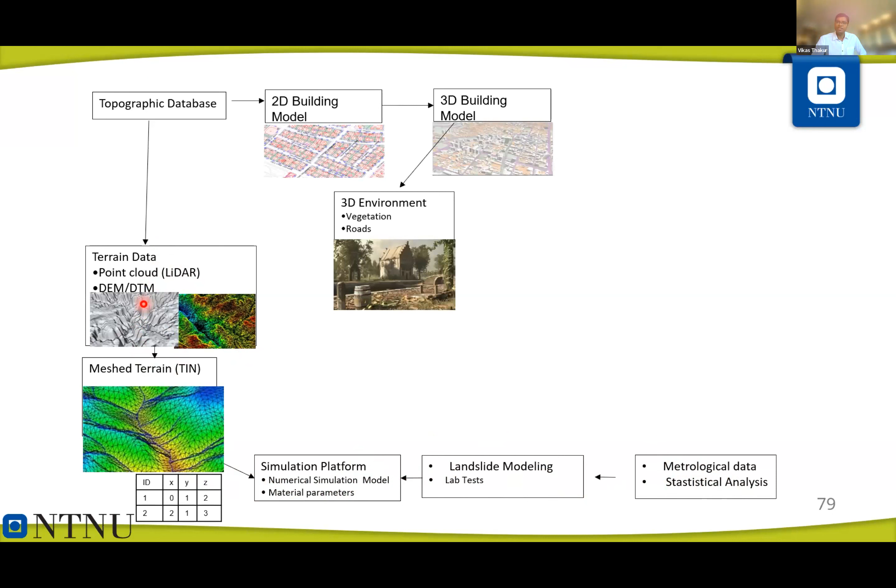If you want to make a virtual reality based game, we also need 2D information about the BIM, building information. Then we need to have 3D images - it could be infrastructure, it could be buildings. We also need a 3D environment, the vegetation, and different roads and different objects. They need to be combined with our numerical simulations.

When we do numerical simulations, we get different results of how a landslide is moving, at what speed, where material will be flown. Those material information from numerical simulation need to be tied together with the 3D environment generated through the BIM model. These two need to put together: something from geotechnical engineering, something from geodesy. They need to be combined in a virtual reality environment to create a good user experience. So here we need to work with computer science programmers.

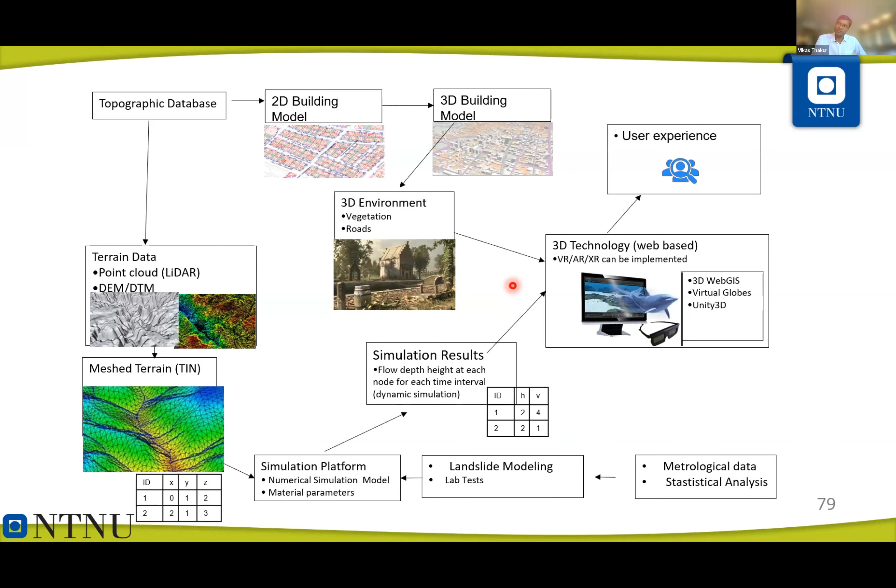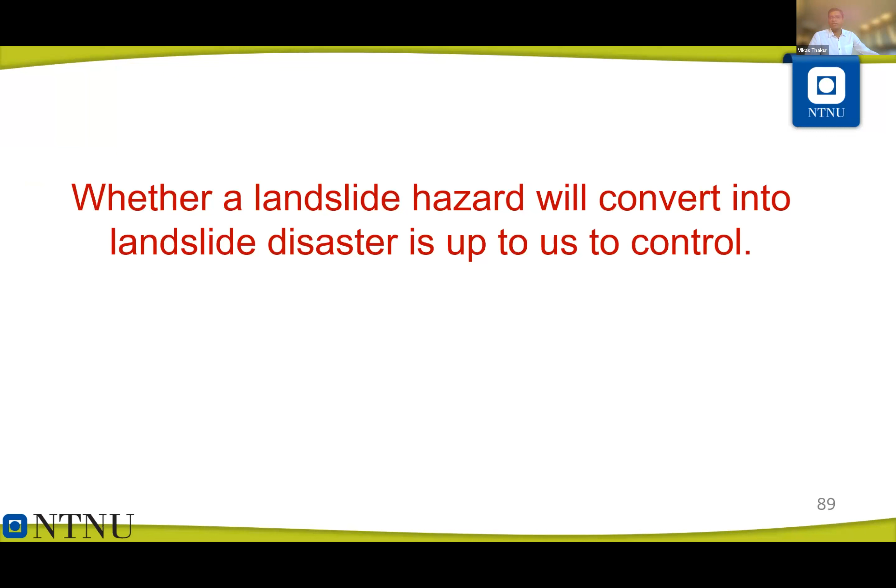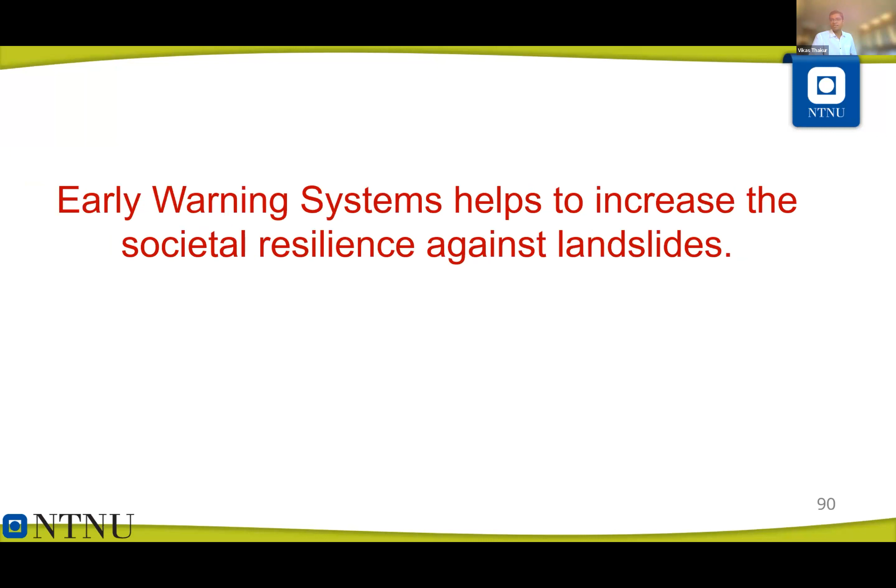Whether a landslide hazard will convert into a landslide disaster is up to us to control. Through better design of structural countermeasures and better early warning systems, I think we can avoid turning a landslide hazard into a disaster. Early warning systems help increase societal resilience against landslides. This is important, and we should emphasize more and more having accurate, precise early warning systems. Landslide susceptibility assessment should be dynamic and regularly updated to account for changing climate, so that we don't only have one susceptibility map based on slope angle and friction angle of the material. We need to make it dynamic by including changing climate and external factors that may affect the susceptibility.

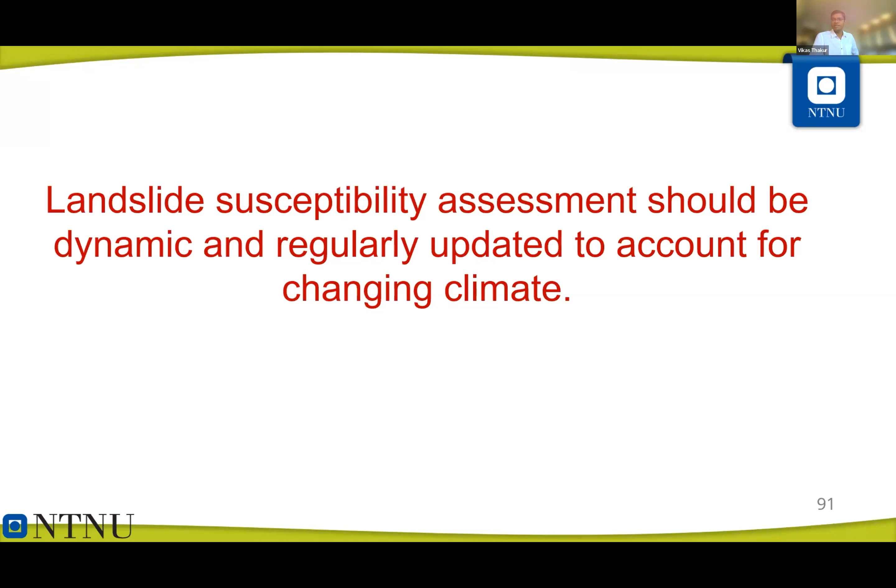Combining state-of-the-art knowledge from different domains, such as digitalization, as I was showing in the virtual reality environment, and IoT sensor technologies, opens new possibilities to conduct risk assessment and risk communication effectively. With this, I will close my presentation, and I think I've used my time. Thank you very much.

Thank you so much, that was fascinating. A very, very, very interesting presentation. I really like that you covered a lot of different ground. So yeah, you stated that...